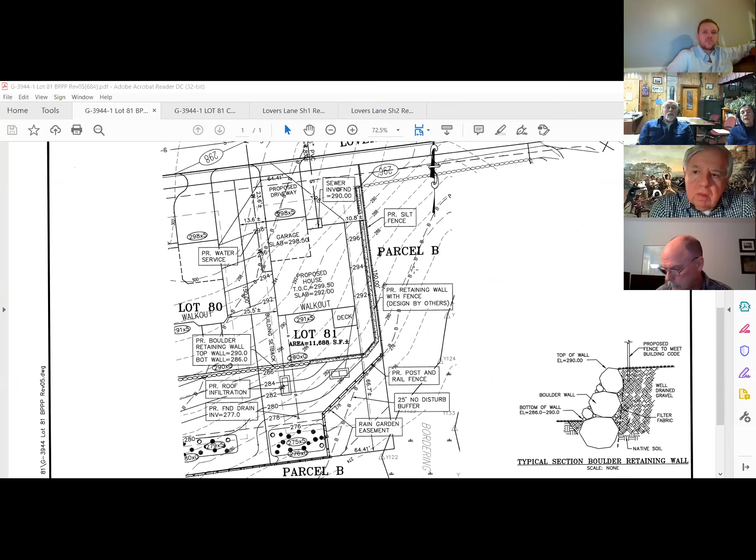So the first cross section we have is north-south, running through the center of the lot where my cursor is going through. The cross-section view is facing east towards the open space parcel, so Lover's Lane would be on the left-hand side of that cross-section.

For the second cross-section, another one is provided with a little more detail on the Versa-Lok plans, but it's just looking facing the wall from parcel B. This cross section is more to illustrate where the building would fall in relation to the overall length of the wall, and it also shows the existing grade at the face of the wall so the commission can have a bit of understanding there.

The final cross section we have is through the center of the site, and it's from a view as if you were standing at parcel B, looking north from the bottom of the hill, looking up essentially. Just so everybody's clear there.

Is everybody able to see the cross section now? We are, okay great. So as mentioned, this is facing east, and it's a north-south cross section. Existing grade is the dashed line represented here. We have a proposed grade sloping to Lover's Lane on our property, a garage showing the footing as well, basement area, first floor, and then our proposed grade to the Versa-Lok wall.

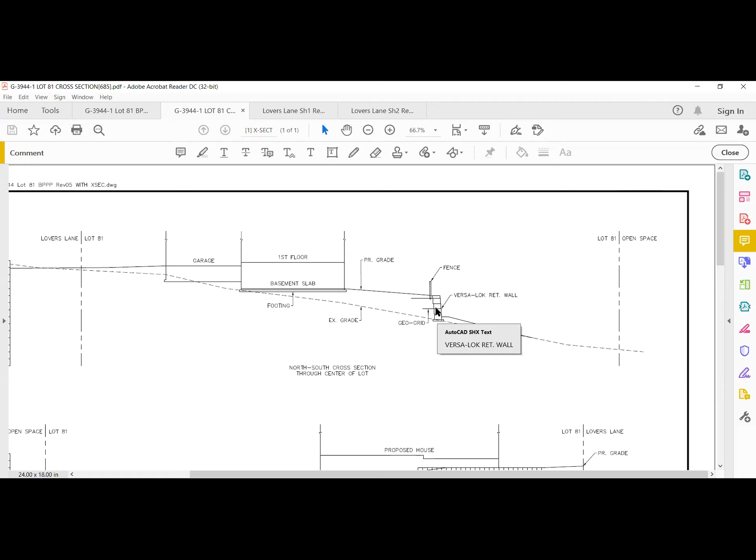Essentially for the construction of the wall itself, and then this would also wrap around the wall. But we will be digging out for the footer here, very minimal into the existing grades. We'll be installing 2 to 3 blocks and then have the geogrid pulled back as needed for it. That area in between the existing grade and where the geogrid would be compacted.

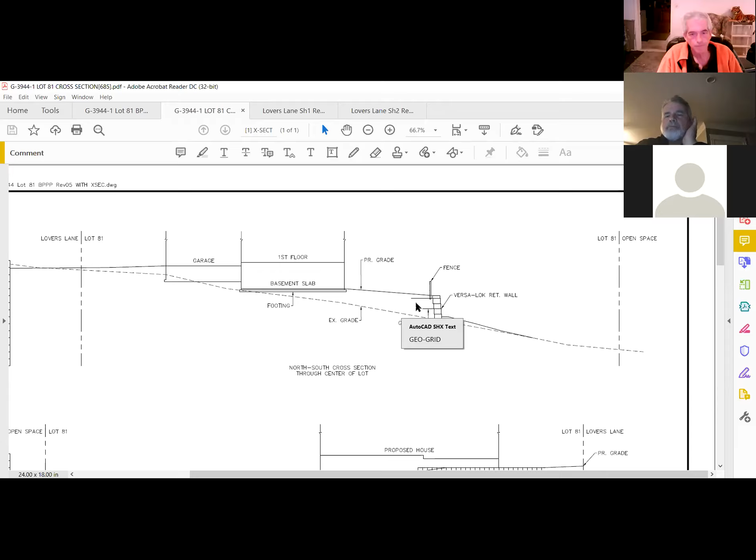And then as everything is compacted and leveled out at that point, we will be then going up additional courses. It's not that the wall would be installed first and then any backfill to be taking place. Everything would be done in essentially like a 12-inch lift as we get up to final grade at that point.

Is there any questions right now for at least this cross section through the center of the site? I don't have any, Frank. I mean, nope, I'm fine, yep. The rain garden's to the right, right?

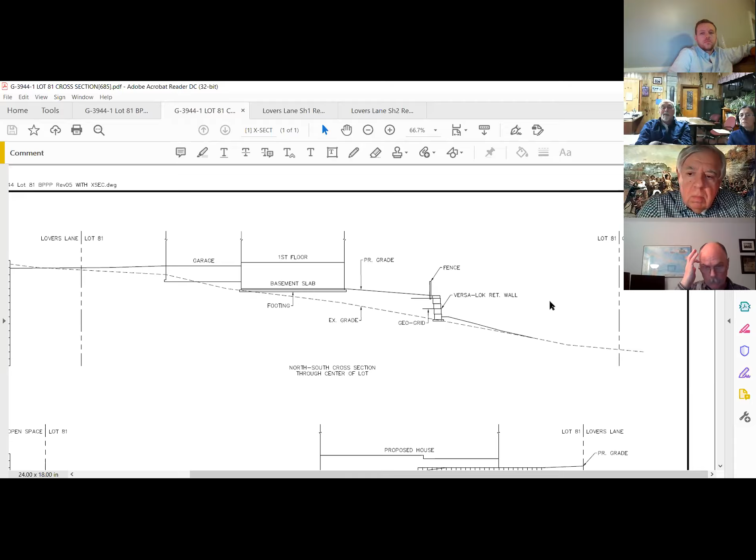Yes, the rain garden will be located down here. Because it was cut through the center of the site, the rain garden did not fall into that view. But essentially where the rain garden is, if we were to essentially reposition that, it would just divot down a very little bit and then come back up meeting existing grade. There is no intent to have any additional fill or anything brought in to create that there.

And what's being done with the slope between the rain garden and the Versa-Lok wall? What is the plan and the operating plan? What are the plans call for?

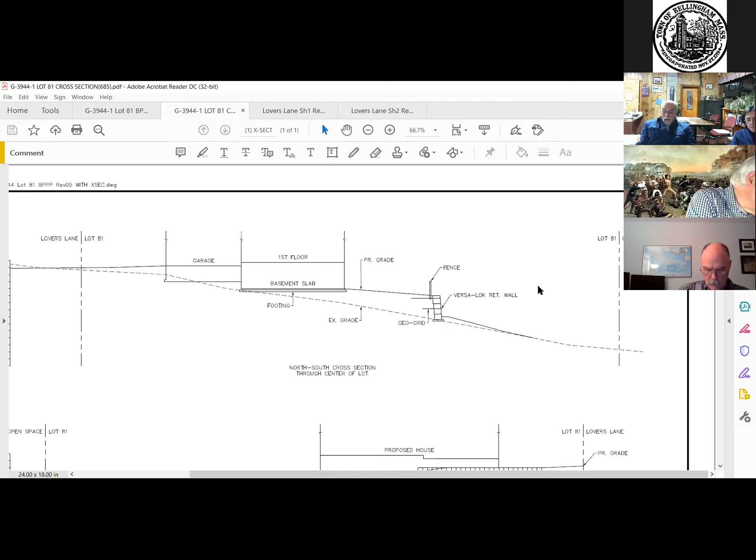So right now, as far as the slope goes, that's going to be just proposed as a 3:1 slope. It's intended to be a grass area, but if that's something that the commission would like to carry over any of the other comments from the past lots that we had, like 78 or 79, we can obviously update with any sort of notes if needed for that.

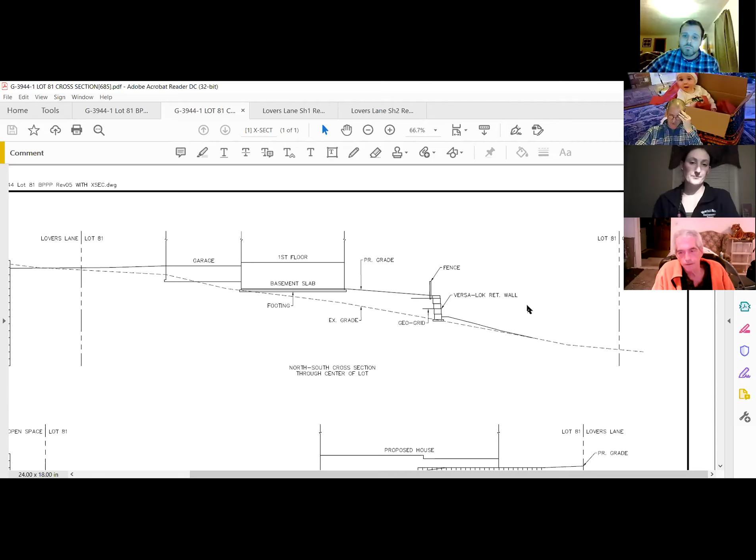I do have a question slash observation. If looking down at the overhead view, if I remember right, the left side of the lot as you're looking down on it and with Lover Lane at the top, the property 80, I think it is, to the left of it, abuts it completely, right? I mean, there's no like right-of-way easement or pathway through there, correct?

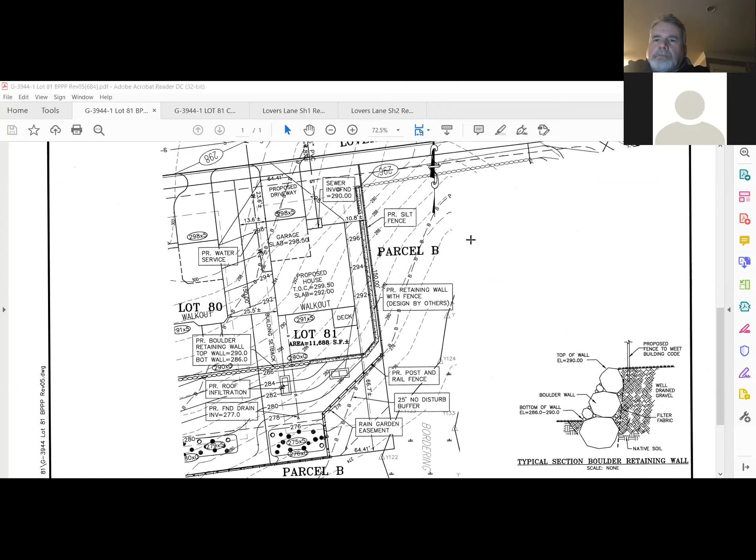So 82 is over where my cursor is shown over here. The open space is there, Mike. No. To the left as you're facing the view right now. Lot 80, sorry, not lot 82. Lot 80. Yes. Okay, so my question is this.

If there is a wall that is at the lowest point, the left-hand corner of lot 81, the block stone combination, and then it becomes all stone boulder wall, yes, goes all the way off the property, and it's grass below, how is the property owner going to maintain that grassy area and mow it when they can't get over a wall with a mower? Because they can't go down the other side of the parcel B area to get access to it.

As far as that goes, that's something that we could possibly have maintenance done through the rain garden easement. If there is a concern over that, we really can't grade in anything for a slope there, but no, I'm not looking to grade it a slope or anything. Don't get me wrong, I'm fine if it grows in and becomes vegetated heavily, but I'm thinking the property owner might not want to have that happen or feel that they have to maintain it or something.

And there's a stone wall which stops them from mowing the small area in the backyard and then over into and around down toward the rain garden. Certainly don't want to mow the rain garden, but it just seems like you've created a barrier that's not going to be able to maintain a grassy area. So maybe the commission or developer wants to consider something alternate for that area.

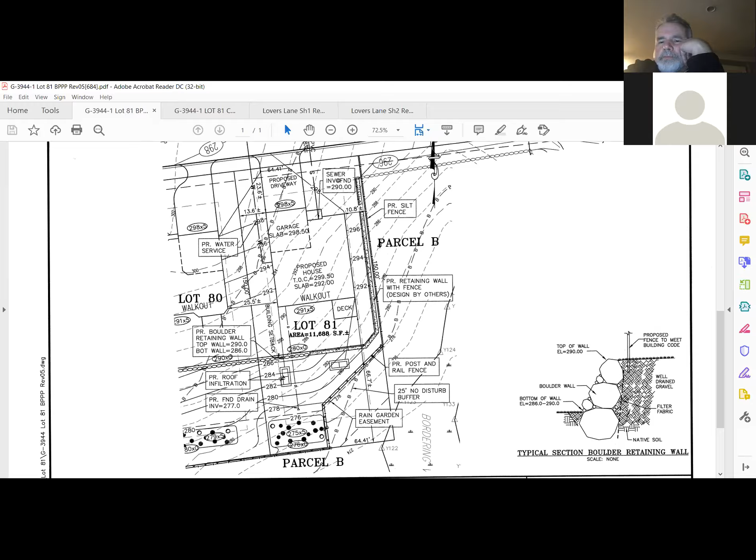As far as alternate goes, what would be some of your thoughts with regards to that? I think your initial thought was correct - if the property owner decides it's too onerous to perform maintenance on the area, it will become naturally vegetated, and it won't affect the rain garden function because the roof infiltration units will be providing sufficient groundwater to keep that viable. Also, it does pitch towards the rain garden, so any runoff that doesn't infiltrate into the ground will eventually make its way over to that rain garden area as well.

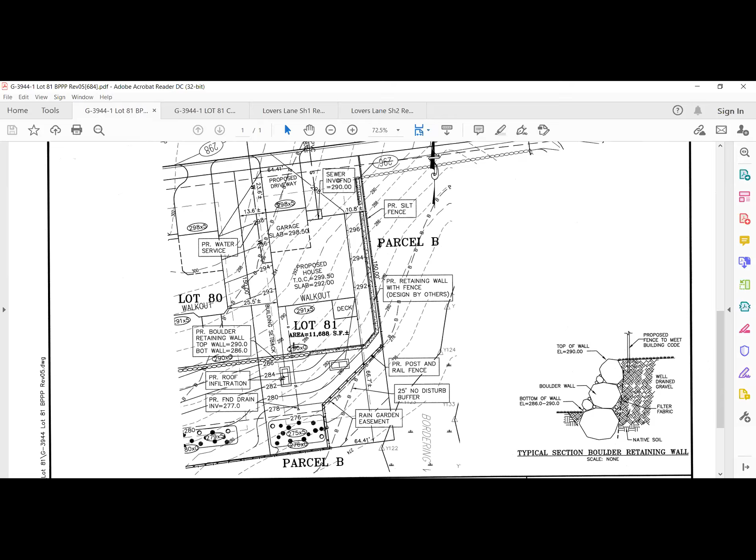I think, Mike, if somebody buys lot 81 or lot 80, their backyard is the 20 feet from behind their walkout to the wall - that's going to be their backyard. I have no confidence that it will be clearly explained to the property owner that they don't have to maintain it, and that it's fine with us not to maintain down there. In fact, if trees start growing up, they may want to preserve their view. I don't know how nice a view it is to see scrub pines popping up beyond their wall, and whether they'd want to maintain it knowing it's still on their property.

So just the access point - we don't want people climbing over the wall back and forth lugging equipment, or if they chop down trees, they shouldn't leave them back there. There should be some sort of clarity to the property owner as to what they should or shouldn't do beyond the wall. We're going to have badges on the fence, correct?

Yes, that would be the intent for it. And as far as that goes, I'm sure we can put something together to inform the property owner. I don't believe they're going to be receiving a copy of the plan, so I don't think notes on the plan would be sufficient. But if that's something we need to include, like in a purchase and sales agreement or something along those lines, I'm sure we can talk to the applicant's legal team about putting that together.

John, when you said we could access the area back there through the rain garden easement, it sounded like you were speaking on behalf of the developer, a property improvement agreement - what do you call it, a land property owners committee or association? Is there one? I'm not sure what would be proposed for that. I do know that we provided a rain garden access easement, so if that area absolutely needed to be accessed, they could get through it there.

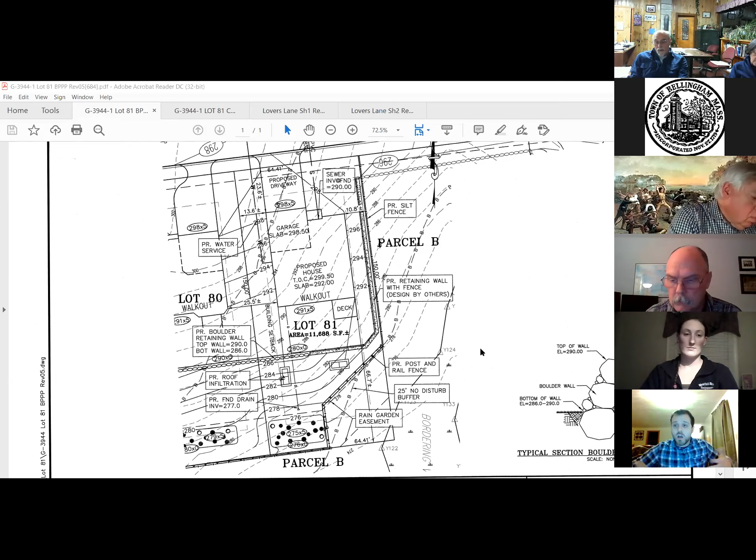Sorry for cutting you off, Cliff. Go ahead. I was just going to say, from a logical standpoint, I don't really foresee somebody wanting to go all the way around to the access easement or having to traverse that 4-foot portion of the wall just to use a sloped area. So there shouldn't really be concerns about people going down there to try to use it. Also, bear in mind we have the fence proposed along there to help deter anybody from throwing clippings over, or lugging equipment over the wall.

So let's take a look at the next cross section. Sure.

So the next cross section I have here, as mentioned, this would be north-south facing west, so we have Lover's Lane on the right-hand side of this cross section. Essentially this is just showing a view of the wall if you were looking from parcel B, but mostly this is to show the relation of the house to the wall. So this is the 20-foot backyard area they would have, and this space would be left open with the no-disturb buffer, so nothing would be touched there. As far as the footings shown here, this was prior to receiving the structural drawings from Versa-Lok, so I estimated these, but I'll go into more detail when we look at the Versa-Lok ones for the actual depths we'll be excavating through there.

Again, this was just more of a visualization for what would be going on. That's exactly what we are looking for.

One quick question, Cliff, if I could. The dotted line, John, that represents the existing grade. I understand that the Versa-Lok below the grade measurements might be more accurate and different than what you're showing. That's fine. Above the existing grade line, however, is that a correct representation of how high the wall will be in the back as compared to the front of the lot above the grade line?

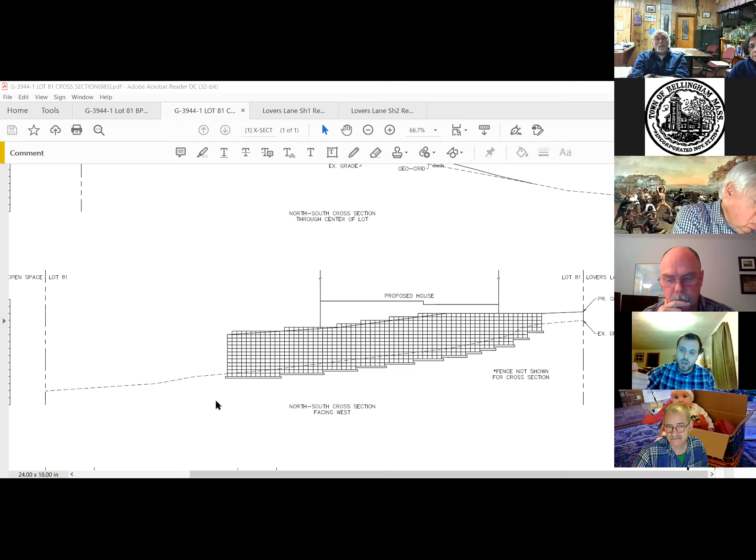But as far as this dashed line representing the existing grade goes, that is cut right through the front face of the wall. So if we were to go right up to the wall after it's constructed, this is what the grade would be there. And that is something that would be protected by the silt fence, so nothing would be changing on, obviously, the open space side of things there.

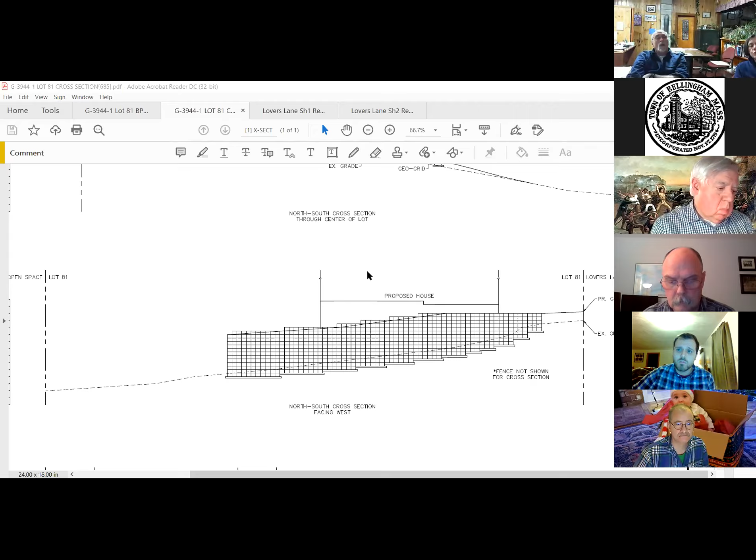Yeah. So let's take a look at the Versa-Lok engineered drawings. I do have that final cross-section if the commission did want to take a look at that at all. Okay, sure. And then that final one was just the cut through the center of the lot.

As I mentioned, the grades do taper off into that southeastern corner of the site at the bottom of the overhead view that you were looking at. So again, we would be going in, digging down approximately 22 inches to where the bottom of the base stone would be. They would be filling in about 6 inches with sand or gravel as specified on the structural plans, and then we'll start installing the blocks.

Once they clear 2 to 3 blocks, they would be having the geogrid pulled in. That would get pulled as far back as needed and then compacted and filled accordingly. As they progress up the wall and compacting all the way out to meet existing grades, once they get to the point of where the foundation would be, then that construction will be done in conjunction.

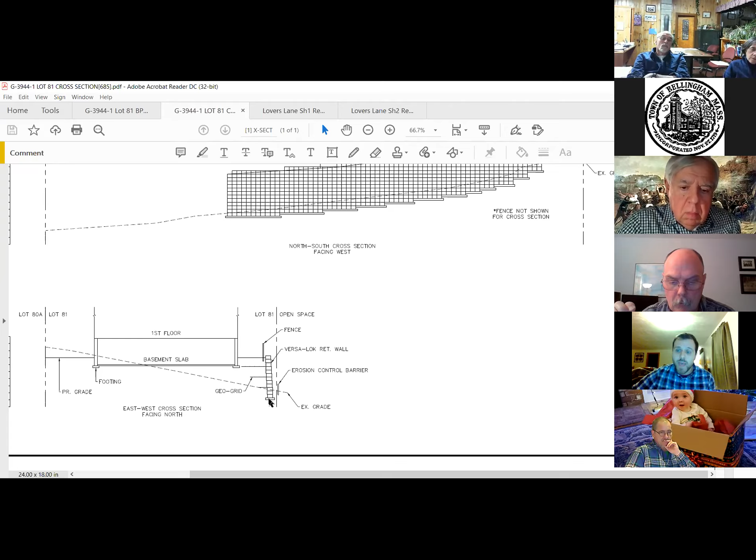Essentially, as we've already stated previously, no work will have to be done on the front side of the wall. Everything can be constructed on the back side. Essentially, they would be using the compacted area as a flatter base to do work as they work their way up, and then can blend in anything accordingly with it.

And then again, this is just more for visualization purposes, but if there are any questions, I can try to answer them.

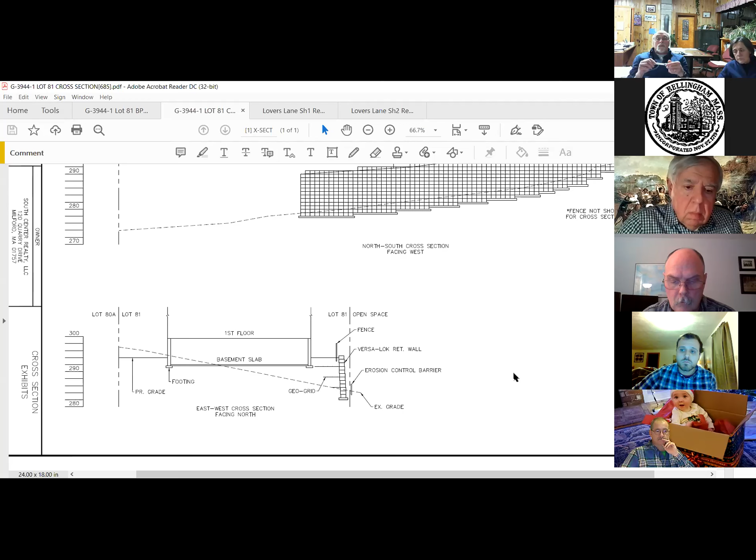Okay, let's look at the Versa-Lok, sure. Versa-Lok engineered proposal.

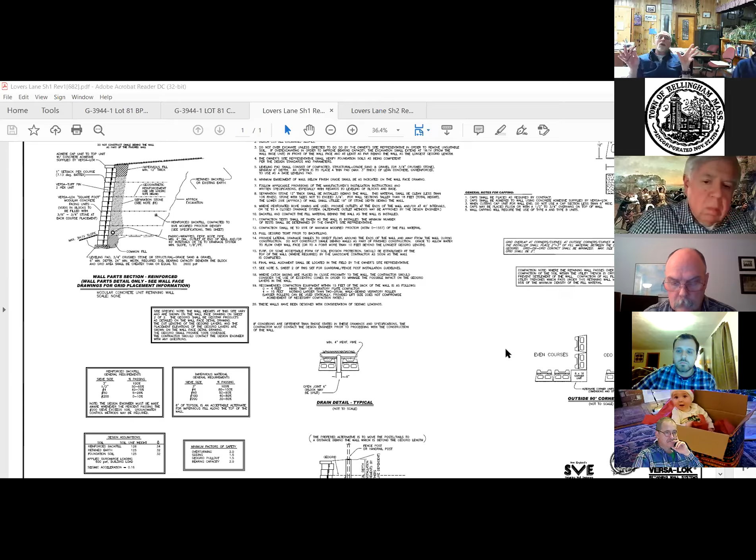I see our Director of Inspectional Services is present. And once we take a quick look at these, because everyone's had an opportunity to peruse them, I'm going to ask that our administrator relay the conversation that she had with our Director of Inspectional Services relative to the actual construction methodology. And then we'll have Frank comment on some of his proposed special conditions, because I think it's all going to be tied together. So if you would proceed.

Sure. So with regards to the Versa-Lok plans, the structural engineer, his name is Randall Brogdon, if I'm pronouncing that correctly. I did speak to him on inspections that would be done for the wall, as that was one of the comments brought up during the last meeting. Typically, he would be going out to do 1 to 2 inspections, but any more, or if any are not needed at all, that would be dictated, he said, by the municipality directly, since this is going to have to be pulled with the building permit through the building department. So he will be the one that can certify the wall and any construction that will be completed as satisfactory.

With regards to the actual construction itself, after speaking with the applicant a little bit further, they are going to be subbing that out to a third-party contractor who specializes in Versa-Lok walls. And if needed at all, as mentioned during one of the last meetings, Versa-Lok does offer to have one of their representatives come out to also help oversee that construction to make sure that everything is done according to the plans and to Versa-Lok specifications. As far as the actual plan itself goes here, are there any particular areas that you would like me to note or zoom in on?

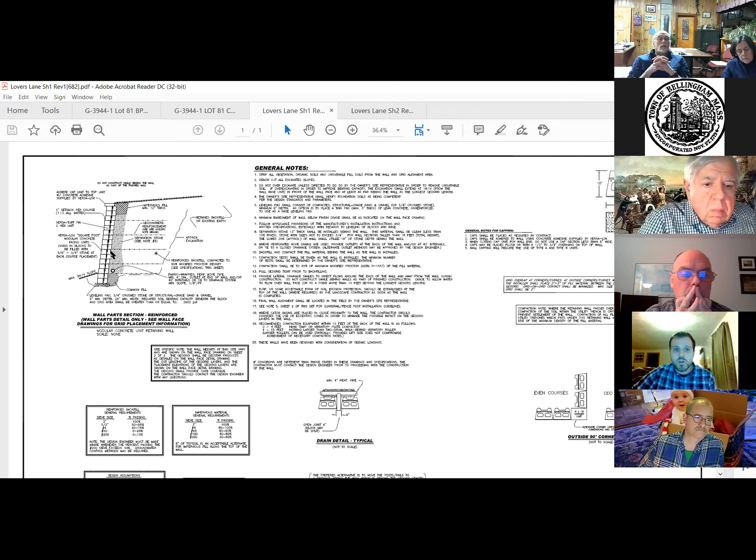There's no concerns with any sort of water or hydraulic pressures trying to push out the wall and cause failure there. Also with regards to that, outside of the 12 inches of separation stone, they have a note for any backfill that would be placed there, as well as notes on their compaction.

Outside of that, it's just more of their general notes. They do have a curve detail down here that adds to the structural integrity of the wall. Instead of the 45-degree angles we had proposed there, they would use the blocks and do a slight offset adjustment with them in order to provide this curve.

As mentioned, that is more structurally sound versus having to cut the blocks or create a 45-degree angle there. They also provide a typical fence post detail, and on the next page they have installation notes for those fence posts. It's recommended that the fence posts be installed outside of the geogrid lengths, but in this case they would have to be installed behind the wall, so they have special notes for the care of the geogrid to make sure nothing jeopardizes its integrity.

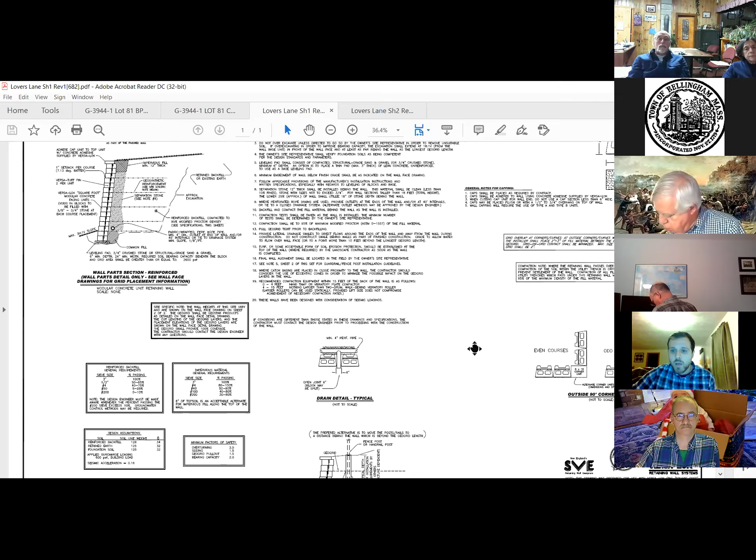Outside of that, let me just see here. They also provide a compaction note as well as a standard block view. There is a second sheet that provides some more information, including a cross section as well as those notes I mentioned on the post for the fence installation.

Is there anything before I swap pages that you would like me to zoom into or note specifically on this here?

I think I'm okay. Frank? You okay? I'm okay, yeah. I think some of the questions I had, we'll get into later, but they're being answered.

Another thing just to note while I have it fresh on my mind, I know there were some concerns working in close proximity with the wall and the foundation. They also have a note here on the compaction equipment.

Anything between 0 and 3 feet will have to be hand compacted. Then anything from 3 to 15 feet away from the wall, they specify no large machines other than a 2-drum walk-behind vibratory roller. That should be able to fit within the amount of space between the rear of the wall and the foundation without any issues there.

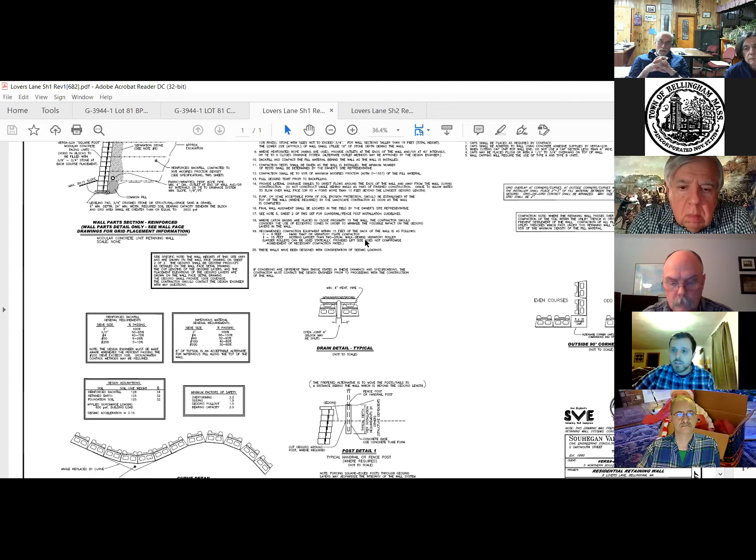And that's not something that again would be using any large equipment on the opposite side of the wall or doing any work on or close to the open space side of things.

And the foundation will be constructed concurrently with the construction?

Yes, once it reaches the level of being flush with that layer of block, geogrid, and any compacted material, they would start to set up the forms and proceed forward with the foundation construction, again in conjunction with the wall construction.

Okay, so like I said, our Director of Inspectional Services is present. Tim, is there anything here that is unusual? I know we have some issues about the fence post installation and all of that. When they pull a building permit, if you would let the commission know, how does that process work? How would you interact with the inspection of the engineer of record? How many inspections would you require to make sure that the work is done properly?

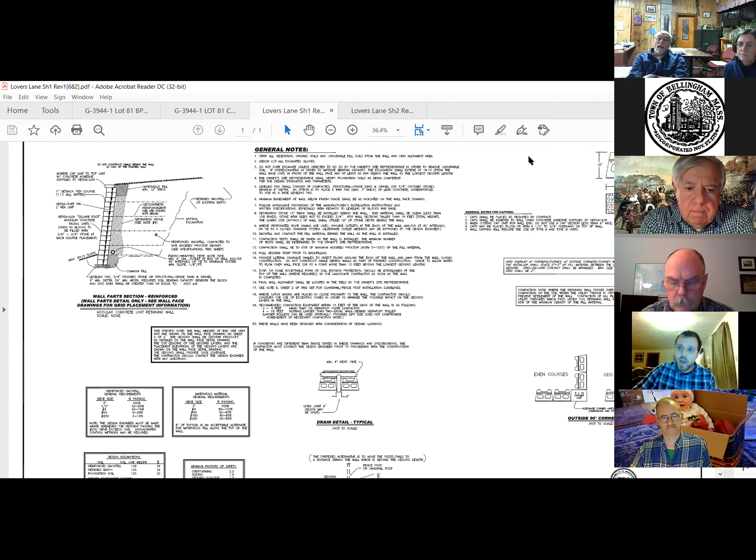Okay, so that was one conversation we had. And the 45-degree corner on the wall, is that out now, and you're going to radius it like that? Well, as far as it goes, we're still proposing that, but during construction they would be following what they have here for a curve detail. They also have some specifications for those. Since the blocks aren't perfectly square, as you can see in the upper left-hand corner here, that does allow for some flexibility in terms of how close they get those in order to help make that radius. And that is something that I believe might be mentioned in one of their notes, or at least it was in my discussions with the engineer, that it actually makes for a more structurally sound wall than if we did try to have it as a 90-degree or even a 45-degree angle. Yeah, no, I can see that definitely.

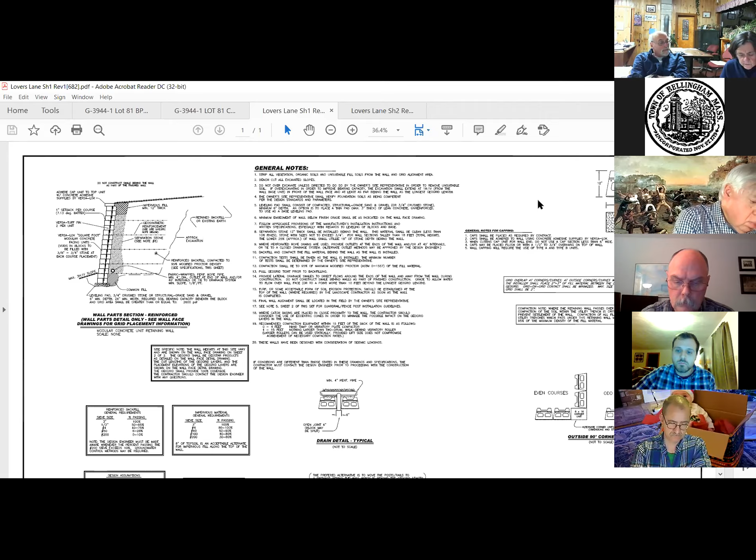All right, so moving over to the fence post installation. I saw the note that the manufacturer put on the plan regarding the fence post. So with the geogrid going through the grid, the posts are going to be - I can't tell what the scale is. How far from the top of the wall is the fence proposed, I guess? Right now we don't have anything set in stone for that. Essentially we would be going behind the wall with it. Whatever is typical in that case, I don't know if they would come 6 inches off the uppermost block, or if that might be a foot off the uppermost block. But whatever is typical there, that's where the fence post would be installed, running parallel along that whole length.

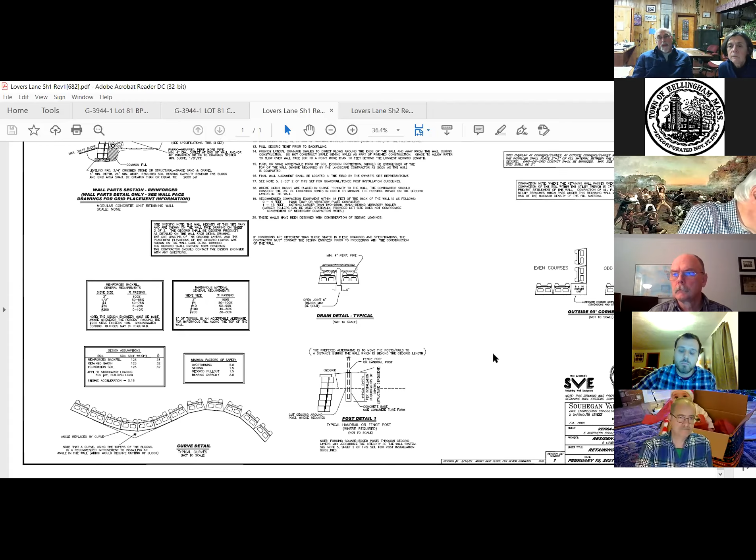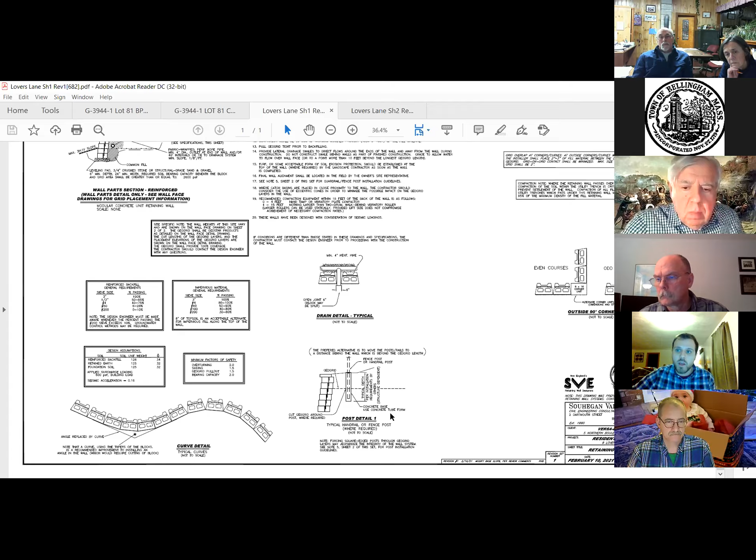I can see what their concern is, that's why they put the note on there to cover themselves. But am I looking at this correctly? Is there going to be a sleeve installed while they're doing the geogrid? This is a typical one. As far as what the specifics are for the fence post installation, that would come from the contractor. I know that they do specify, and I can show on the second sheet if you'd like me to flip over to that now. Sure. They do have a few alternatives listed. In the notes, they state that they do not recommend or would like to see any sort of square posts installed that way. But they do allow for a rounded post, and if it does need to have a concrete sleeve, they have specifications in there for how to handle that.

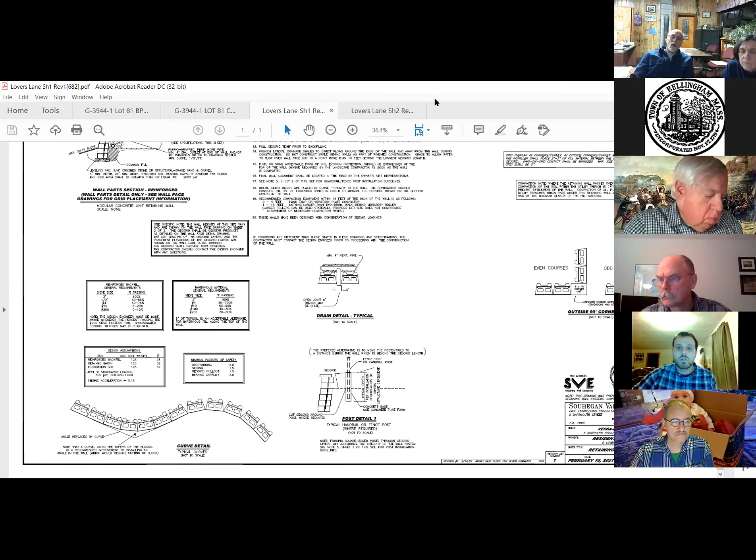Yeah, please go to the second page. I think it's more illuminating.

Tim, I did speak to John about shifting over the construction of the house. I guess they have to adhere to the zoning board permit of the 25-foot setback from building to building between lots. Is that correct, John? That is correct.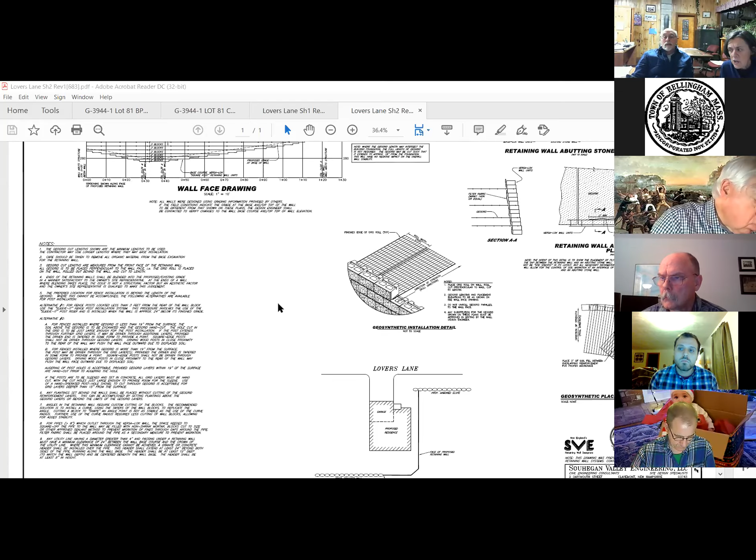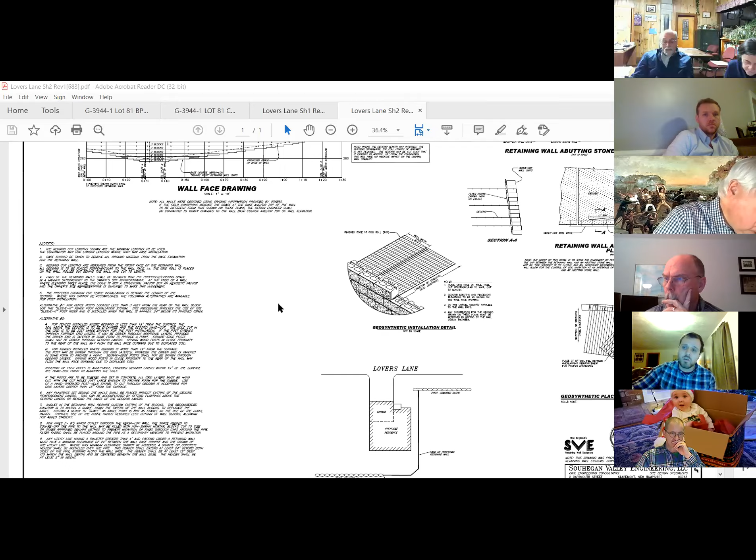Currently on the plan, and I can flip it back after we take a look at sheet 2 here, it is at its closest point 25.5 feet away from the adjacent structure. That is something we try to provide on our survey side, about 6 inches of play, to make sure we don't have any sort of issues once everything is constructed. Since we are tight to the setback line, about 10.8 feet, if I recall correctly, with a requirement of 10 feet for the setback, most likely that side would be pinned at the footings to allow them to do any sort of offsets accordingly to get to the other side. If that makes sense there. Yep, okay.

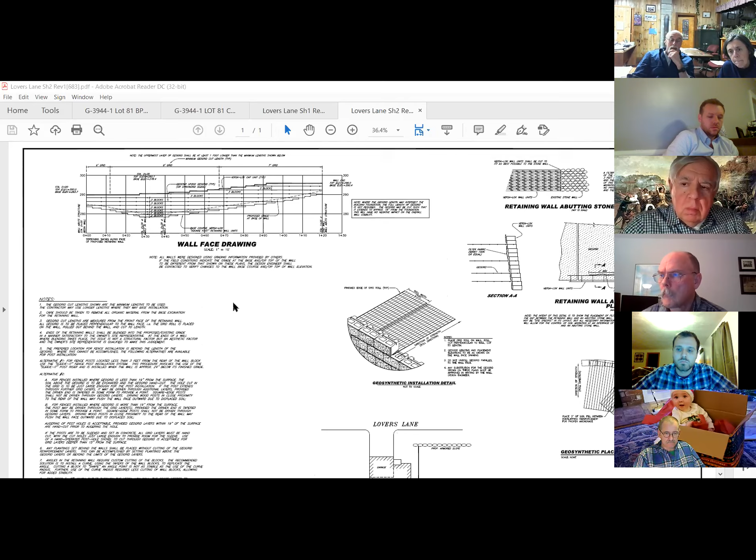So on the fence installation, I'll work with the contractor on that. He's going to pull a separate permit anyway. I think the best way to proceed would be to lay out the fence posts while they're doing the grid, instead of just driving something through it.

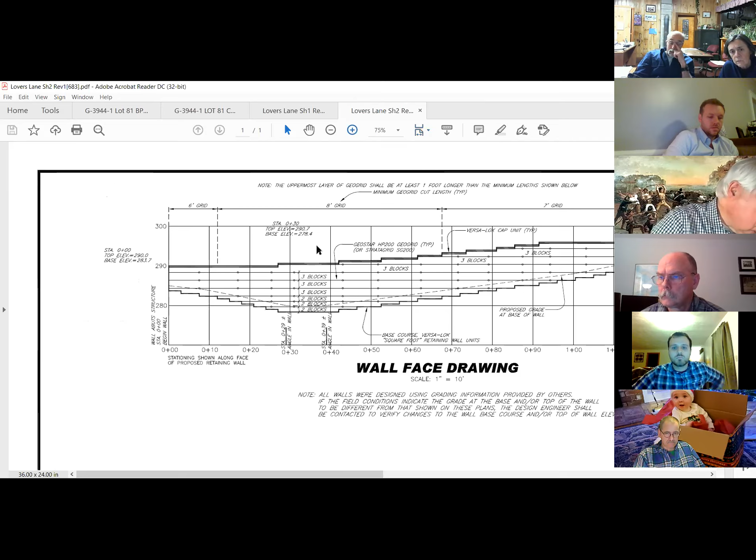You know, cutting a circle in it and doing the layout of the fence posts that way, they could just put sleeves in and then put the posts down into the sleeve. But I can go over that with the contractor when they get going and coordinate inspections. I just want to see the geogrid put in the way it's designed, at the end of the day.

With regards to that, if there are any concerns over the geogrid, there are a couple of notes here we can go over more specifically. As of right now, the alternatives provided start at note 5: preferred location for fence is beyond the length of the geogrid. Where that cannot be accomplished, the following alternatives are available. Alternative 1: fence post located less than 3 feet from the rear block, use the sleeve-it fence post installation system.

The procedure involves a sleeve-it post riser installed when the wall is approximately 24 inches below its final grade. If there is any geogrid that riser would have to go through, they recommend hand cutting the geogrid at that point. Pretty much all of this installation would be hand done, nothing with machinery.

Alternative 2: if it's going to be installed within that 3 feet or so, and there is geogrid located 19 inches from the surface, soil above the geogrid is to be excavated and the geogrid hand cut. The hand cut hole in the grid should just be large enough for the post installation. If the post extends to further grid layers, it may be driven through additional layers, provided the driven end is tapered to form a point. They also note that square posts shall not be driven through geogrid layers, since driving wood posts in close proximity to the wall may push the wall face outward due to displaced soil.

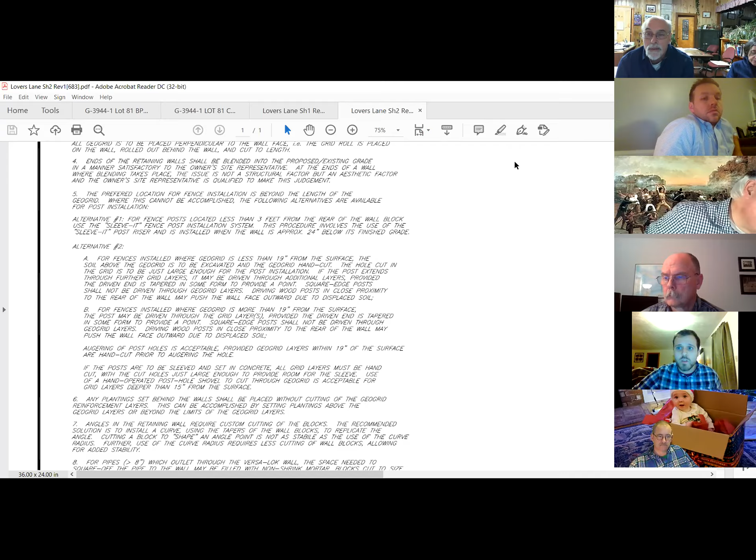I don't handle anything on the architectural side for the house construction or anything on the structural side for the wall construction. If they do need to have somebody available for that, we'll try to note it to them with as much time as possible. But as far as we go, we're just handling the site development portion, so I'm not specifying anything just yet on that.

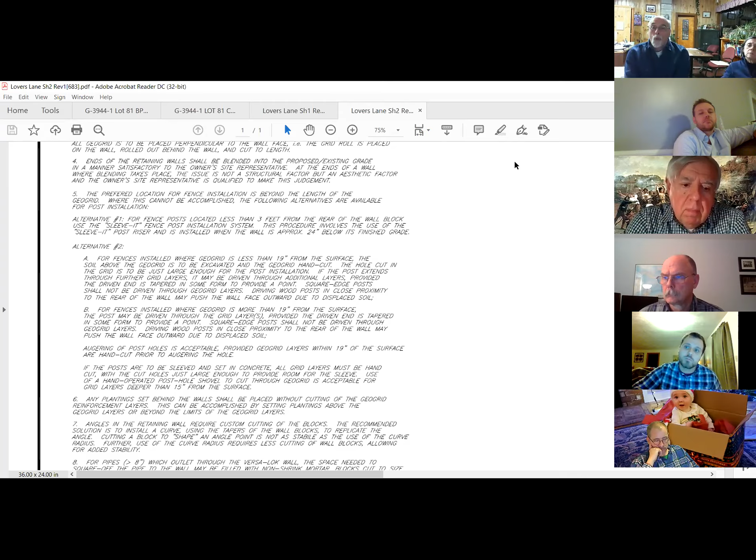Yeah, I meant the foundation wall. With regards to that, I figured that would be more of an architectural specification, but if it is something that we can note, I'll definitely have that mentioned to Fafford. I'll take a look at it on the site plan. We can condition that, and that way you'll get the compaction information that you need.

So one of the things, we can go back and look at the sheet that Tim was talking about, but I'm looking at note 5. It says alternative 1 for fence posts located less than 3 feet from the rear of the wall block. What is the minimum distance they recommend for putting the fence next to the wall?

With regards to that, I did not see any sort of minimum distance that they had specified for it. I'm not sure if there's anything in building code that would dictate that. I would anticipate that they might be going a foot off of the rearmost block and then installing it, but I'm not sure if there are any specific rules or regulations.

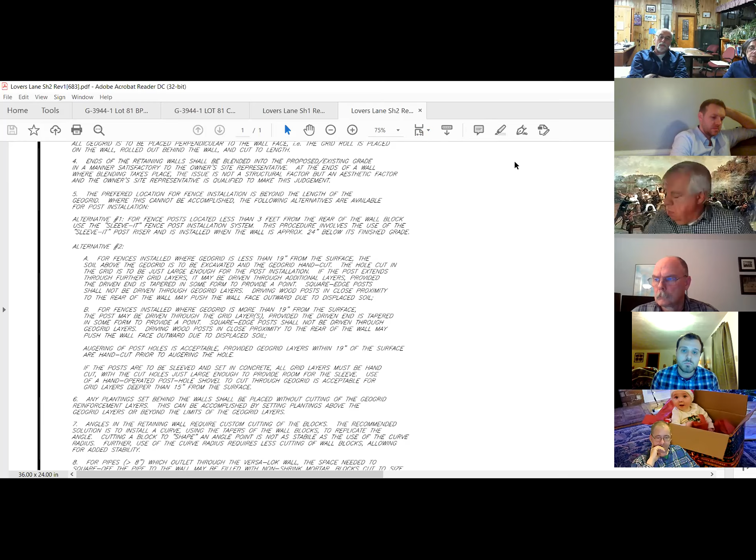You know what I can do, Cliff, is when they submit a plan for it, I'll just be looking for that, and I can talk to the engineer on it. Whoever submits the permit for the wall, I'll have to get a detail for that. One of the things we're concerned about is because of the distance between the foundation and the top of the wall, we're talking 10 feet. Obviously the developer is going to want to maximize that area for egress.

And yet, from our perspective, the further away from the face of the wall the fence is, the more secure the wall is going to be in the long run. So there's kind of a balancing act here. What we don't want to see is, for expediency for the homeowner on the wall, the fence being a foot or 6 inches off the wall, because in the long term that could affect the integrity. I don't think it would necessarily affect the integrity too much.

I know that anything they have specified for cutting through GeoGrid, if that might be the concern there, there is a note that it would not be affecting anything adversely. But if there are any additional concerns I need to follow up with the structural engineer on, I can definitely do so.

Well, so that was my point, Cliff. I'd rather see them show it on the plan going through their product. At the end of the day, they're the ones responsible. I don't want to put my 2 cents in on that. I want them to design it and have it be their idea, so there's no liability on anybody trying to design where the fence goes. You follow me? Yeah, fair enough.

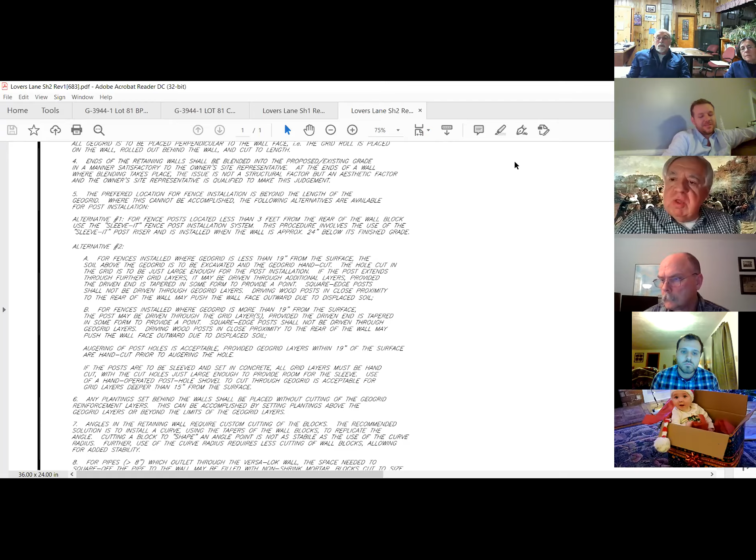I'm actually happy to hear — my understanding is, how do I put this gently, the performance in construction on this site in the past has not been the most stellar in the world. So I wouldn't want something to happen with this wall that's 10 feet high that hasn't been done and appropriately reviewed. So maybe there's a condition, maybe with Tim, that the person responsible on the site is somehow qualified to make the statements required by Versa-Lok to make sure the wall stands up appropriately, blends in appropriately. I think it's basically meeting the building code, to be perfectly honest.

So I think if they're going to have the owners, the engineer was going to do some independent inspections for the wall, so I think that's a good thing. The other thing is when they start construction of the wall, I would go out there to make sure all the topsoil and sub is gone and they're not on fill, they're down to clay or whatever the material, or if it's rock material, and then they can start from there.

I think in the past they've used Yankee for their compaction testing, but now that I have a heads up on everything, I can see the foundation is a fill and part of the wall is probably a fill, depending on how accurate that dotted line is for existing grade. But at the end of the day, they have to scrape off the topsoil and sub and it goes lower. So I'll keep an eye on that when they finally permit for the wall, and I'll have to do some inspections as well.

I think the other piece I had was there's a lot of really good detail in the Versa-Lok design plans. As I mentioned, I've worked with Versa-Lok on other projects on my own over the years. I know Randall Bragdon, I've talked with him. I'm not very friendly with him, but I've known him. The projects he's built, designed walls on, are still standing and have done pretty well, so I have good confidence in his design.

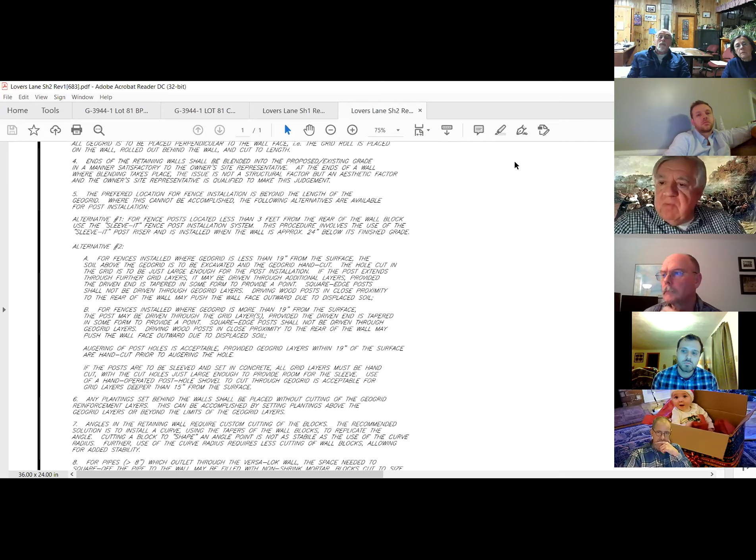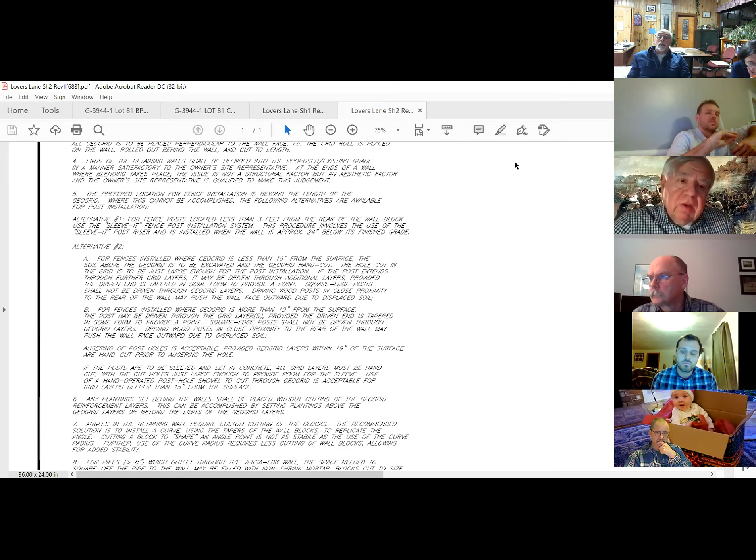The tight area beyond, I guess on the easterly side, the open space parcel B, it's very tight. If you go from the bottom of the wall, it's about 10 feet high. The wall sets back a foot, sets back every foot about an inch, so you've got about another foot from the bottom of the wall face to the top of the wall face. You're now about 8 feet, and that's just about where the 7-foot grid fabric is. There's a note that says you can cut it back some if you get close to the building.

I'm very pleased. I know they mentioned last time it would be nice to get it in writing, that the way they're going to build this wall and the house is concurrently, with the wall being brought up to a point. They do the foundation, they bring the wall up back and forth, because it's a very tight area, about an 8-foot area. You're going to have to fit something in there. I think I'd be a little bit careful with that one.

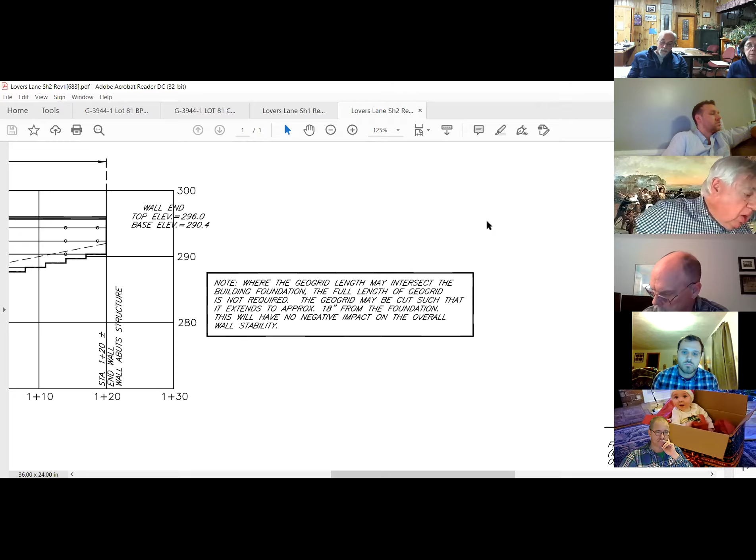Really, I think all the items, my notes got answered, my comments got answered, so I think I'm pretty comfortable, subject to those, whether it be conditions or whether they be under Tim's control or whatever.

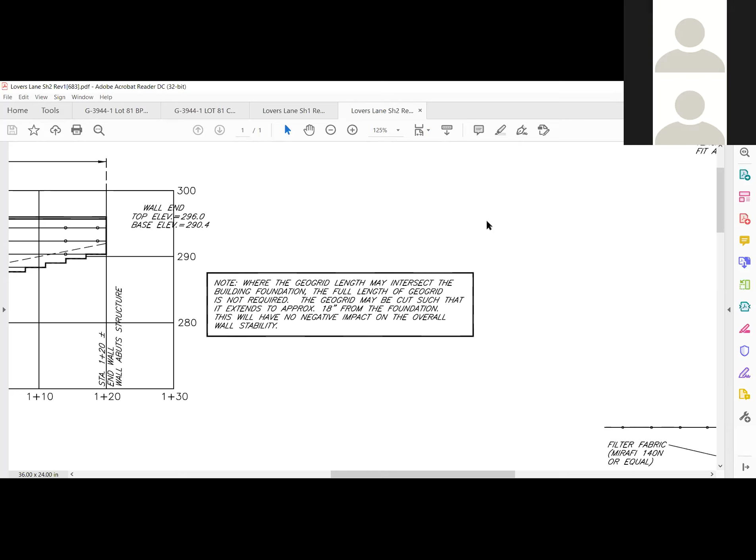All right, any questions from the committee? We heard from Frank, we've heard from Tim. Tim, thank you for your inputs, most valuable. You're welcome, thanks really Tim, appreciate it. No problem. Any other questions from the commission? I would give any other commissioners a chance. I have 2 questions, but I'll let somebody else go first if they have any. Go ahead, Mike.

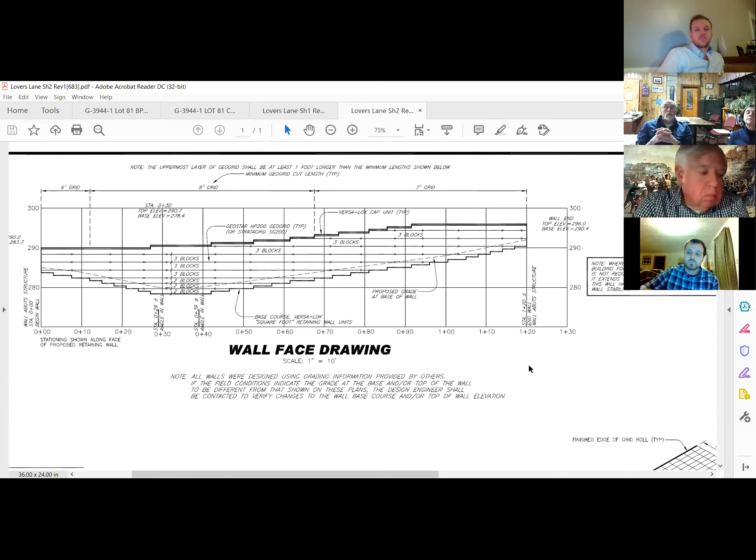John, can you look at the overhead view of the wall in the back there? I'm particularly curious as the wall is now going to be not 2, I think it is 45s that you're showing, but a curve in the back corner there, if I remember that elevation or overhead view. Sure, bear with me one moment here. My question is going to be how close will that curve now, because it does change the way the wall moves.

The right-hand most point, where it goes from straight to the first 45, depending on how that curves, you're right on the line right now. It looked like on that schematic from Versa-Lok that curve can angle out or in depending on how it's curving. That is correct - that's an outward curve. I'm a little concerned that it has been carefully delineated to avoid it.

It sounds like it's going to be decided in the field rather than on your plans, which still show the 45s. Tim asked if it's going to be a curved view now instead, and you seem to be saying yes, but it seems like they'll decide it in the field. With regards to that, as far as our plan goes, it is a site plan.

I believe anything for the construction of the wall would follow the structural plans in that case. If there is any more detail that needs to be put in, I can relay that to the structural engineer on the Versa-Lok side of things.

The intent from any discussions I've had would be to have those areas curving. So if they curve instead of the 45s they're showing now, and that cuts the angle off, it's going to cut it on the inside and not extend outward, correct? That is correct, so we would be coming even further away from the 25-foot no-disturb area. Okay, just wanted to be clear.

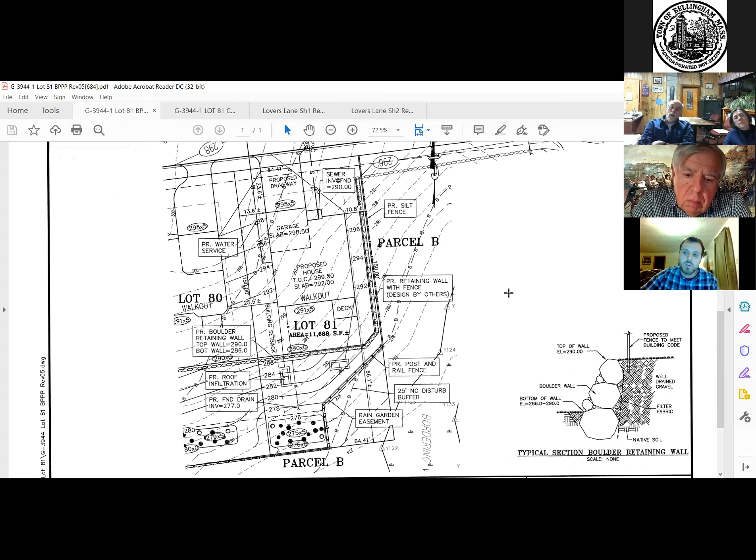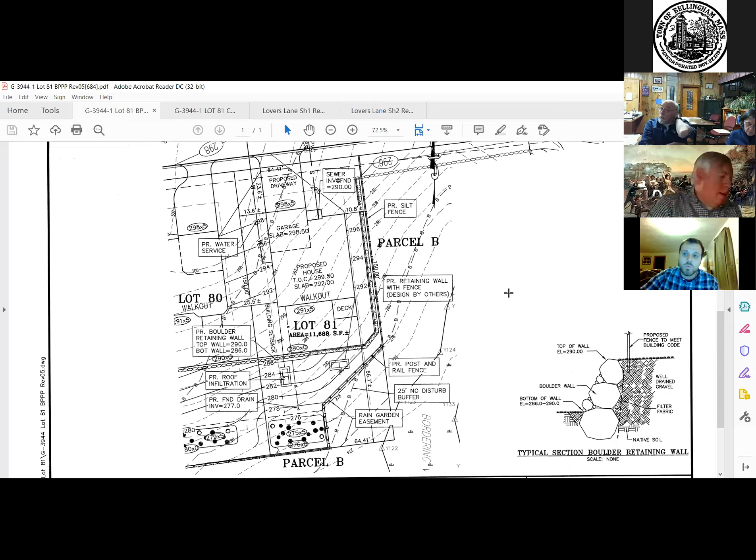Mr. Chair, I'm a little less concerned about moving this particular lot forward. Plenty of other lots in this project are moving forward. But I am concerned that if we know precisely where this wall is going to go from Lover's Lane all the way out to the other corner, I don't know why we couldn't determine beforehand whether they have the proper grade for Versa-Lok to guarantee, with the stamped engineer's approval, that the bottom of the wall meets their specs, and that they don't need to consider moving the wall. I don't go for approving on the fly. I'm sorry, I'm not in favor of that.

Well, with regards to that, I do know that I have reviewed the grades with the structural engineer. On the plans, he does have some rough grades shown. He has seen the cross sections as well. No concerns were expressed over those existing grades, particularly along the longer face of the wall. So I don't foresee that being an issue for them to be able to certify.

Have they visited the site? I'm not fully aware if they have visited the site, but we did have those discussions and provided any additional information they needed. So it's Versa-Lok's opinion that this is standard operating procedure, nothing unusual. They haven't noted anything as being abnormal for this one. I think we need to see that in writing.

And I would further add, Mr. Chair, John, how precise have you been in providing information to them about what the actual pitches and grades are along that entire length? We have provided them a copy of this plan. If they had any additional questions or follow-ups, we've been in discussions with them. I have spoken to the structural engineer regarding the wall construction, and he's not finding any sort of issues there. I'm sure if there was something he wasn't comfortable with, he would not have stamped the plan and submitted it to us.

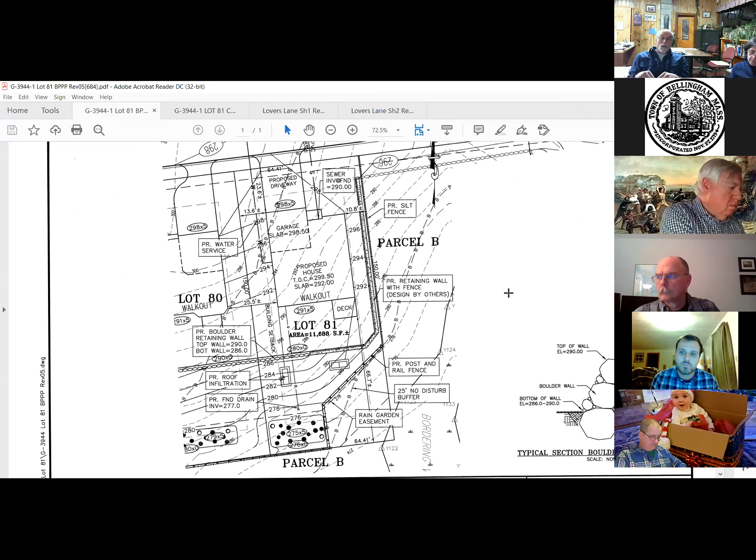From the commission's perspective, we requested a lot of information, and we've requested additional information. We've had it reviewed by the Director of Inspectional Services and by independent engineering review. And I think that we have an alternative. The only other alternative is we deny the project as being unbuildable, and yet what we have here is common engineering practices that indicate it is buildable with special precautions.

I think there was a time when I didn't think the lot would be buildable, but the questions have been answered. Mike, I don't know what else we can ask them to do. What is your thought here?

It's not going to be built by the company who built Lakeview Estates. It's going to be built by somebody who has expertise in building these walls. I've asked all the questions I can ask. My level of comfort isn't high with this. I think it's just frankly too small a lot, too close to an area that shouldn't be disturbed, and with a methodology that I'm not as familiar with.

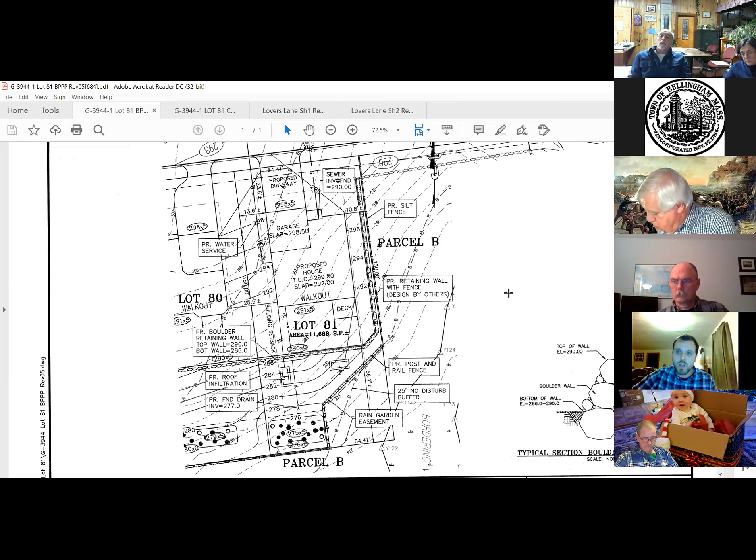That's okay. I know on my end, I'll definitely be able to get you a plan next week, so hopefully that gives you seven-plus days to review anything. And then I'll follow up with Versa-Lok tomorrow to try to get a letter from them. I can't guarantee anything on their time frame for it, but I'll definitely try to push them with the understanding that if they can get us the information, we will be able to have this off your guys' agenda on the 10th. Okay.

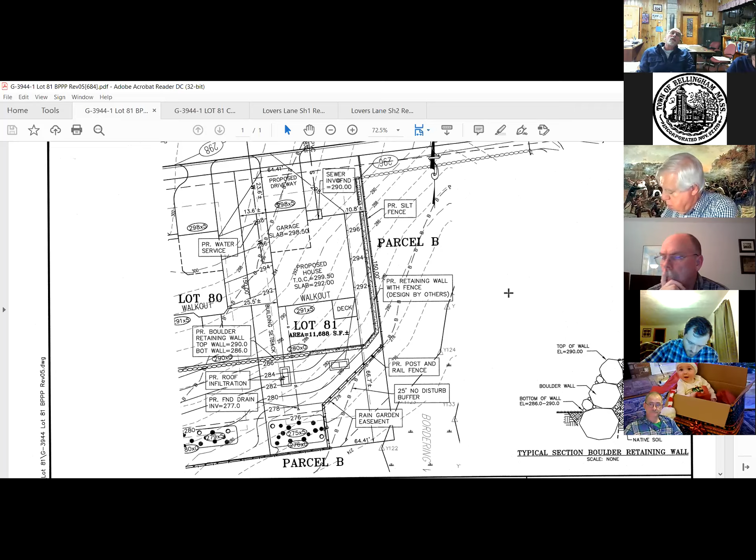Right, that being the case, I'll entertain a motion to continue the hearing for the evening of March 10th at 7:05 and have an order of conditions prepared pending requested information.

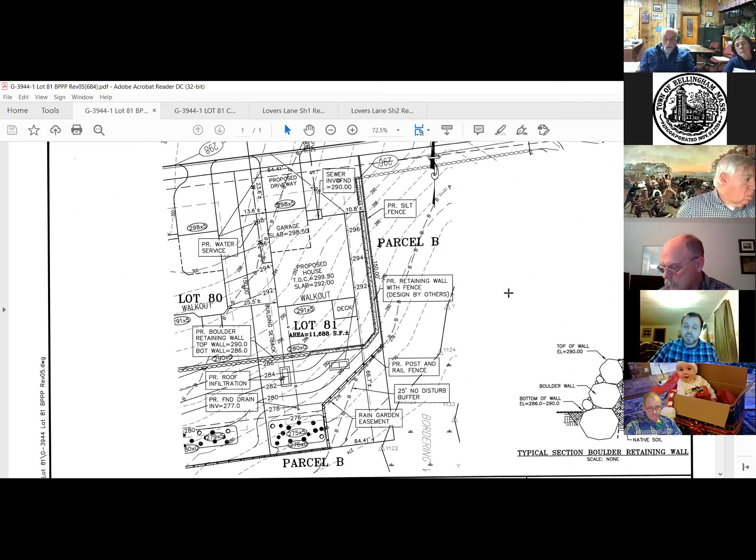Just one final question, to help keep the process moving, would you need a PDF to make any references, or do you need a physical hard copy? I will try to provide physical hard copies as soon as possible. Of the plan? Yes, or any letter as well. I definitely need a paper copy of the plan. Yeah, I will be providing that, but I'm just wondering if getting you a PDF sooner would help keep the process moving, or if you need that physical copy.

Well, I think you'll make every effort to get it to us. Of course that is the case. If I can get you a stamped copy tomorrow, but we can't get a courier over there until next week, if that's gonna hold anything up. Of course, that's fine.

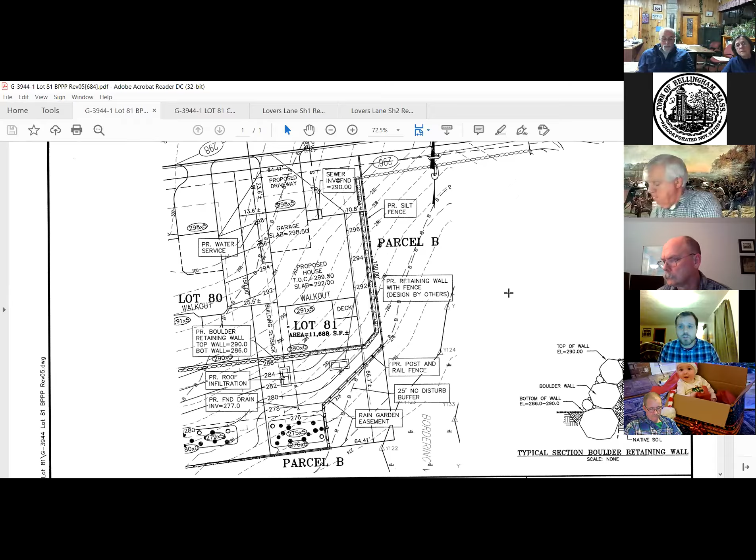All right, thank you so much, I do appreciate your time. Thank you. All right, Tim, thank you very much. Tim, we really appreciate that. You might sign it, thank you. No problem, thank you, have a good night. Thanks, you too.

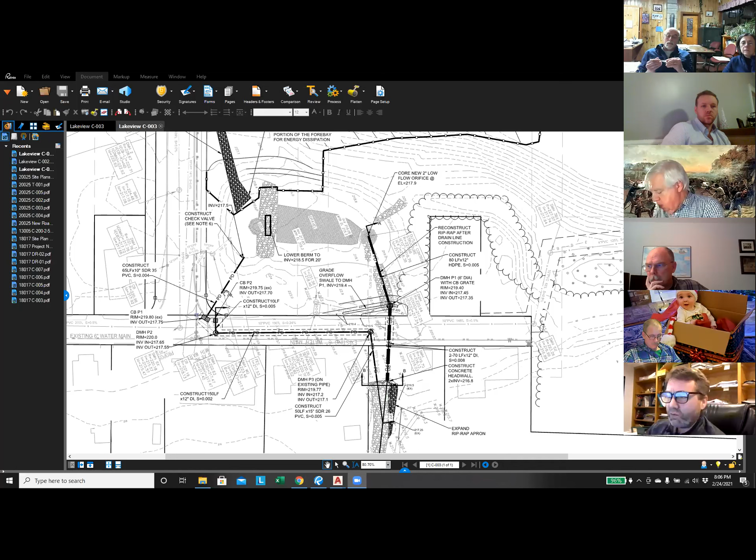Quick recap: we're proposing some additional drainage structures in Silver Lake Road, a new double grade catch basin at the base of Candlelight Lane and Silver Lake Road, which would discharge into the forebay of Basin C. Modifications to Basin C include cleaning out the forebay, reconstructing and lowering the forebay check dam so it doesn't build up as much water and head, and reconfiguring Basin C itself to be an extended dry detention basin by incorporating a new low flow 2-inch orifice at the base so it won't retain storm water, since we've concluded it does not meet the requirements of an infiltration basin.

We've modified the outlet to this basin to disconnect it from the sediment trap installed in Silver Lake Road. Now the basin will have its own discharge to Silver Lake via two new 12-inch culverts crossing Silver Lake Road. This catch basin is also designed to serve as an overflow catch for any additional storm flowage in Silver Lake Road, so it can be discharged through these pipes rather than flooding over Silver Lake Road.

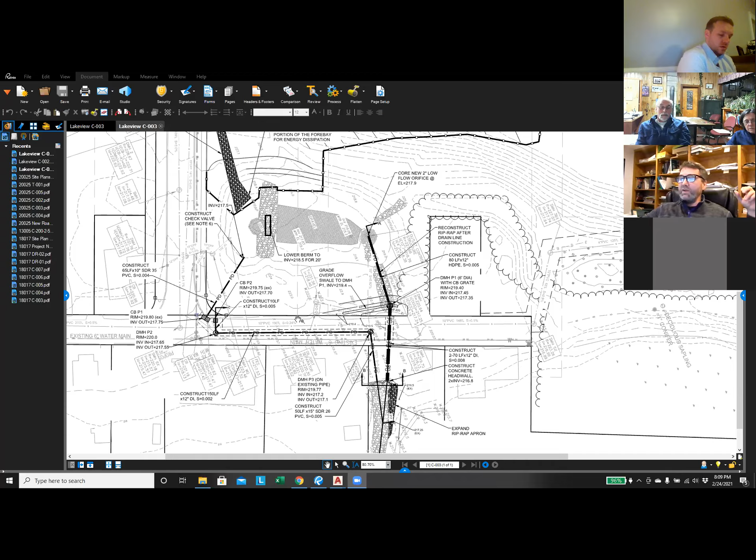In addition, we're removing the stone swales installed during construction on this slope and regrading it, adding a swale along the sidewalk to catch any runoff before it gets over into the sidewalk and runs down the street, essentially cutting off some potential bypass flow.

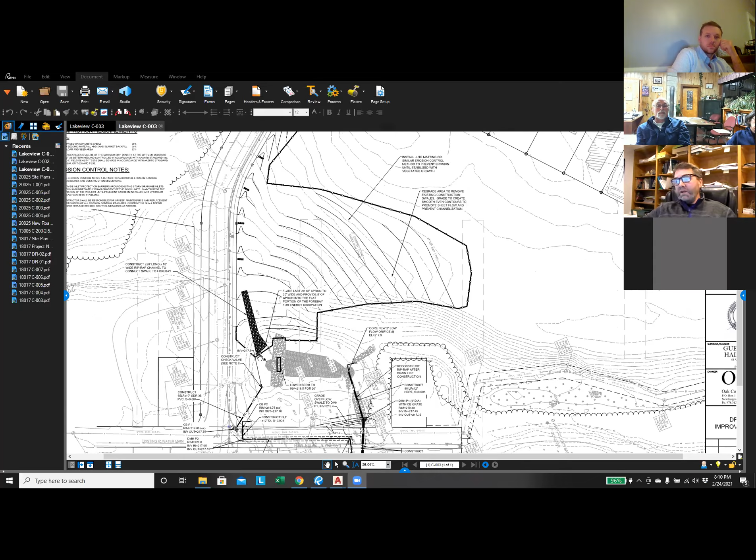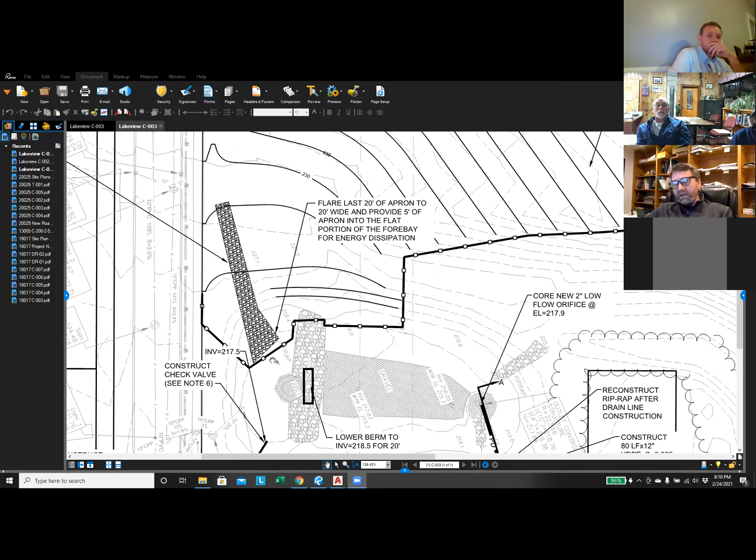One recommendation in Frank's most recent letter was to add some energy dissipation coming into this forebay. So what I've done is extended this riprap apron with a flare. It's a 10-foot wide apron, flared out to 20 feet, and it has to extend at least 5 feet into the flat portion of the forebay. That'll prevent any erosion once it comes down the hill and gets into the forebay. I think that pretty much sums up where we're at on this plan.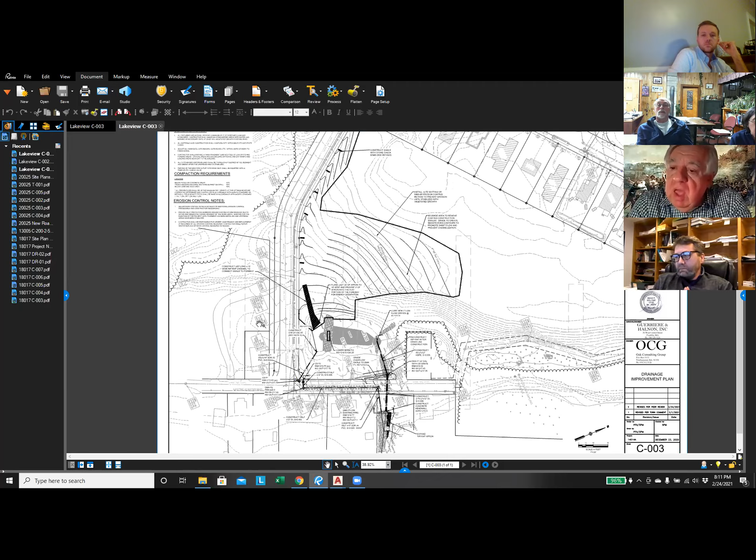I can make this short and then have a couple comments, but pretty much all the comments I've brought up in past reviews have been addressed by this latest set of plans, including the addition of the little energy dissipator into the forebay. I think that's a really good idea. I think that's fine.

There were two other items that were brought up to ask my opinion on. One was, is there some way on that nice slope that's there, it's about an 8 or 9 to 1 slope, 8 or 9% slope, could there be some kind of terrace type drainage system? Way back in the youth of my engineering career, we would use those on major highways like that.

So I went in and actually looked at the old design manuals, which I found out, at least the ones online, are now archived. Part of that is because better sedimentation and erosion control measures, the fabrics, the other materials you put there, have eliminated the need. The issue with the terraces was, one, they were hard to build and maintain, and two, you had to get rid of the water. So you typically had some kind of drain that connected down the slope, and if that got clogged up, it would go down the slope and cause a concentration.

So I would not recommend that terraces be put in this area here. Again, I think the whole key is to make sure it's put in correctly and the slope is stabilized very well before you remove any of the erosion controls. I think what I've seen here, subject to having oversight during construction and immediately after, I think that would be fine.

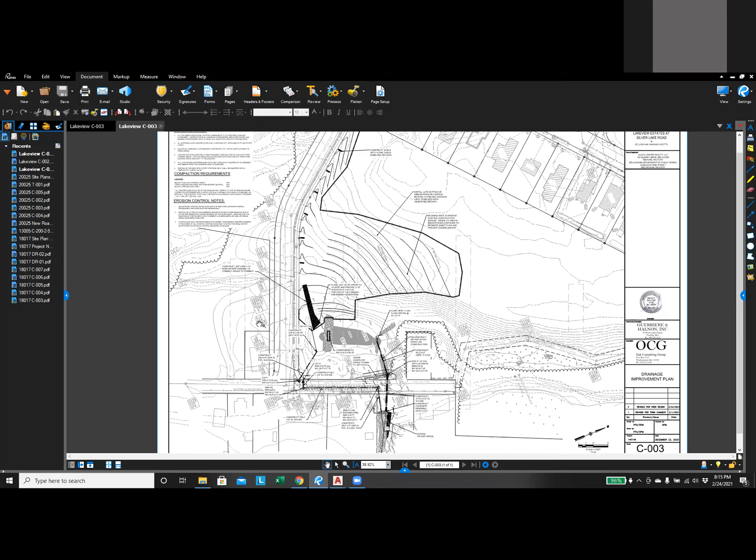Well, I want to thank our newest commissioners for taking this on and presenting their ideas, because I think the ideas had merit. I think we asked Frank on behalf of the commission to investigate it, and I know they brought it to their team, because I had conversations with some members of their team.

In fact, we discussed what our status was on organic chemistry, and I decided that's part of a life I'm glad I left behind. But it's really good to have commissioners involved with ideas, and the ideas were evaluated. I think in this particular instance, what Frank is saying makes a lot of sense.

I'm going to ask that commissioners, when they have thoughts and ideas like these, bring them up at the meeting so we can discuss and evaluate them. We don't want to be doing work behind the scenes, but in this case I think it was warranted. Again, I want to thank both members, Ariane and Noel, for undertaking this, because it just makes the commission better.

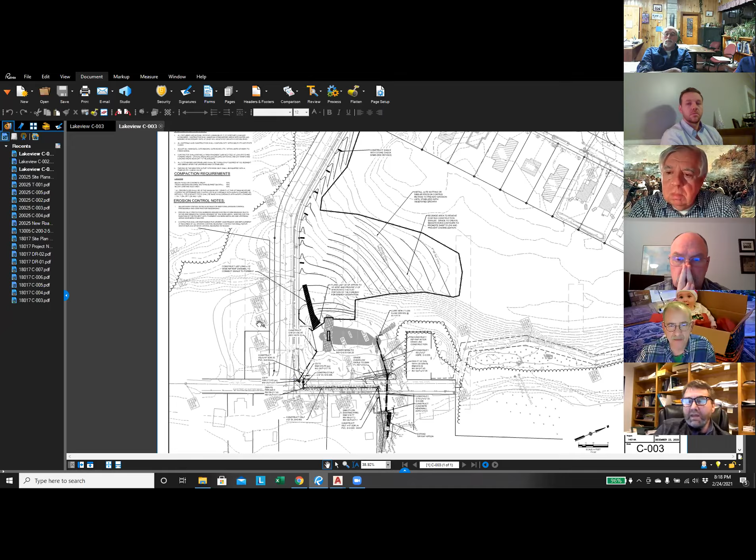I have one about the... we lost you. Oh, sorry. Yeah, I had one about the operating manual part. Are we going to get to that? Got it, the operation and maintenance plan. Yeah, I have a question about that, but I don't want to jump ahead if this is... No, okay, we're open for questions now.

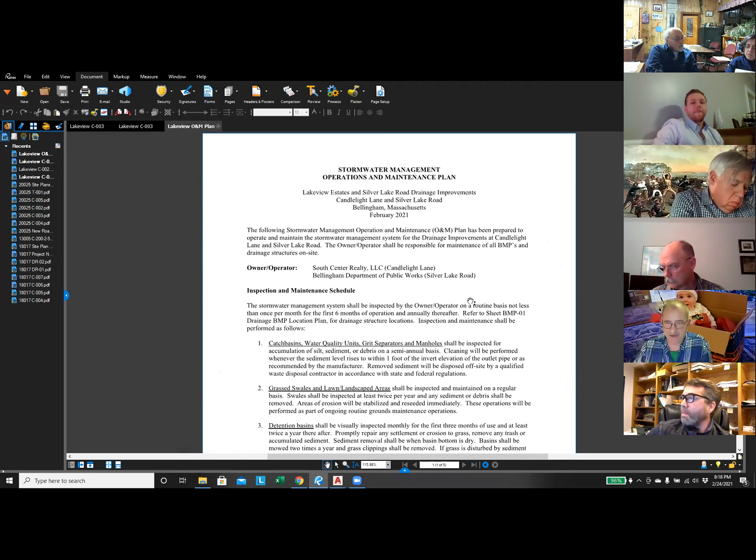Go ahead. All right, so on that plan, the cover page or first page, there seems to be, in my view, a little bit of conflict of timing. The inspection maintenance schedule says the stormwater management system shall be inspected by the owner operator on a routine basis, not less than once per month for the first 6 months of operation and annually thereafter. That's fine. Then I go down to section 5 and it says sediment forebays shall be inspected monthly, which is fine for the first 6 months. But then it says accumulated sediment and debris shall be removed at least 4 times per year, which implies a different maintenance plan than the overall, which would be annually. So after the first 6 months, is it just the sediment forebays being dealt with differently? I just wanted consistency there.

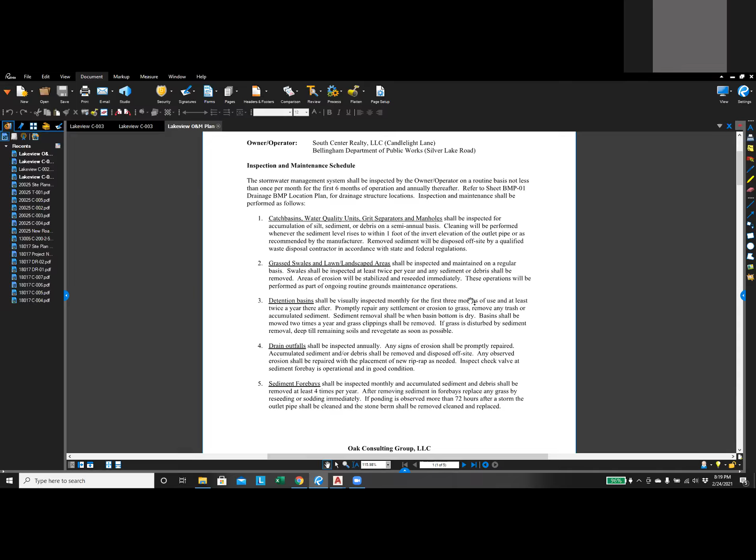I don't know if that's viewed as not a big deal, or if it's confusing to somebody else. Yeah, if I could, I think we kind of have the annually as a general blanket minimum, and each of these items that have a more specific time associated would supersede that. If that's the standard practice, that's fine. I just happened to catch it and say to myself, both for the DPW and for us, we're both on the hook with this in our own areas. I don't know if anybody else has questions about that.

Well, I guess that once the town accepts the roadways and the stormwater management system, it will be subject to a yearly inspection and review. That's normally the standard. I don't know if Don is still on, but... oh yeah, there it is. Is that satisfactory? Yeah, I mean, it's fine if it's not a...

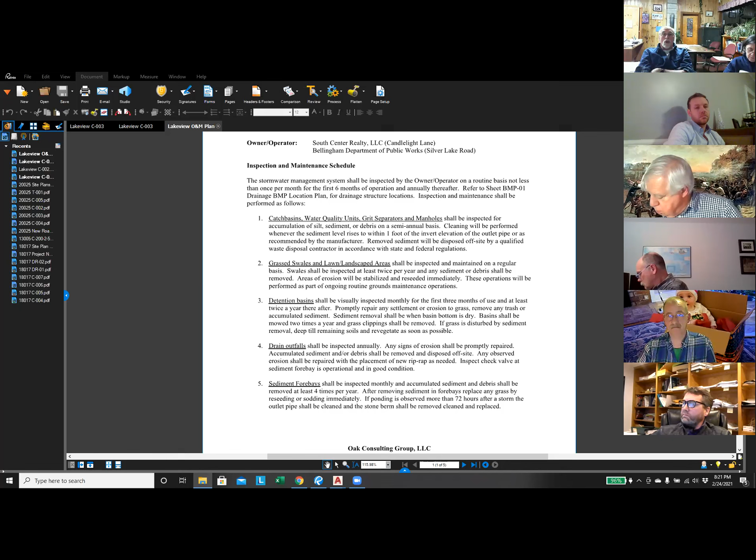Okay, well, that means our stormwater management upstream systems are working properly. You want it to never get to the forebay, and that's what catch basins are for and so forth. This is not during construction—during construction it was obviously a mess, but once it's constructed, the idea is that the water's treated before it gets to the forebay.

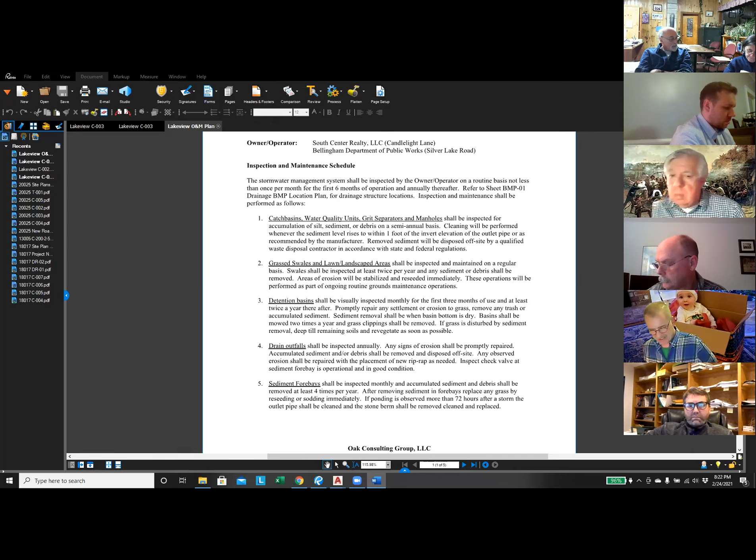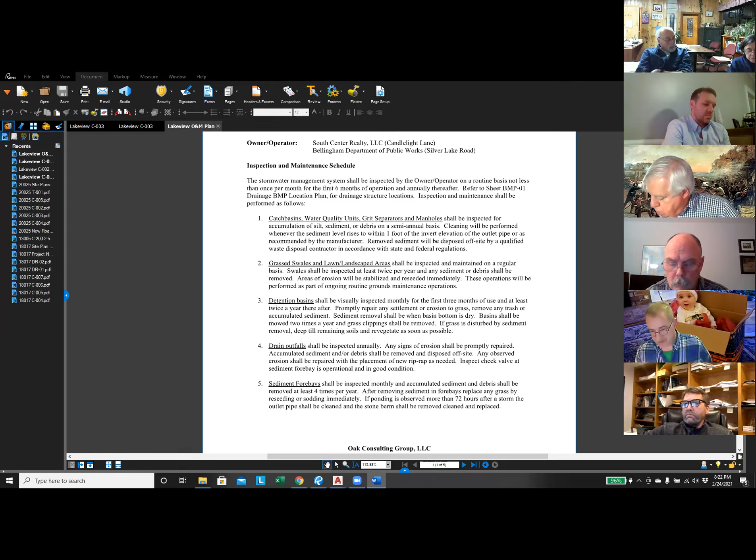In one of the documents provided by Amy and Ann in the Dropbox, I think under the peer review section with Frank and the comments back and forth, the area that caught my eye—and I know we spent time as commissioners walking this area—was the end of the discharge area, the riprap and swale area into Silver Lake, where it had not been dealt with properly and needed to be addressed. It looked like in one section it was talking about cleaning that out, but in another area it mentioned the riprap looked in good shape, like it didn't need any attention. So if it's going to be revegetated or re-cleaned out down at the end near the lake, that's fine, but I wanted to make sure that was explicitly going to happen.

I can address that—Frank, Sean and Jim were there as well, and we looked at that specifically. Technically it appeared there might be a little higher elevation there than existing conditions, but it was completely vegetated with wetland vegetation. So the consensus, Mike, was that rather than excavate and disturb the soils and wait for new plant growth, we'd be better served letting the existing vegetation remain as is. It's all wetland vegetation, and we didn't see any evidence of silt.

That seems a little different than when we were walking in as commissioners a couple of times, standing down there. It seemed like at least twice we stood near the end and said this has to be dealt with. So what changed your opinion—just a reevaluation of the elevation?

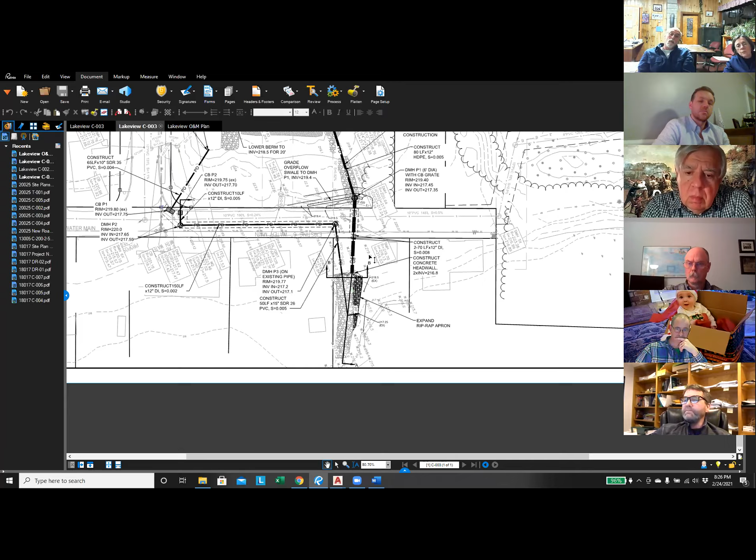Right, okay. And the riprap swale has been slightly widened right there to accommodate that. But the volume of water is going to be very similar to what it is.

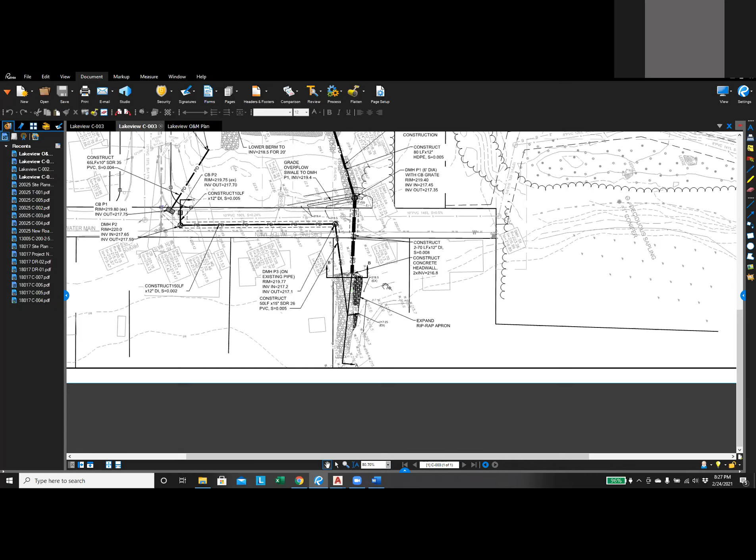There's not going to be an increase in the volume of water because we're catching it, and it's actually going into the basin. The only time there'll be an increase is at the 100-year storm event. Is that correct? Even then, I don't know that the volume is increasing, and what we have here is an actual reduction in the rate of flow going to the pond.

To expand a little bit on what we were just talking about, right now there's just one 10-inch pipe, so all the storm water is being forced through that one pipe, producing significant velocity coming out. By dispersing it between the 3 pipes, we're going to calm that down, so I think there should be an improvement to that effect.

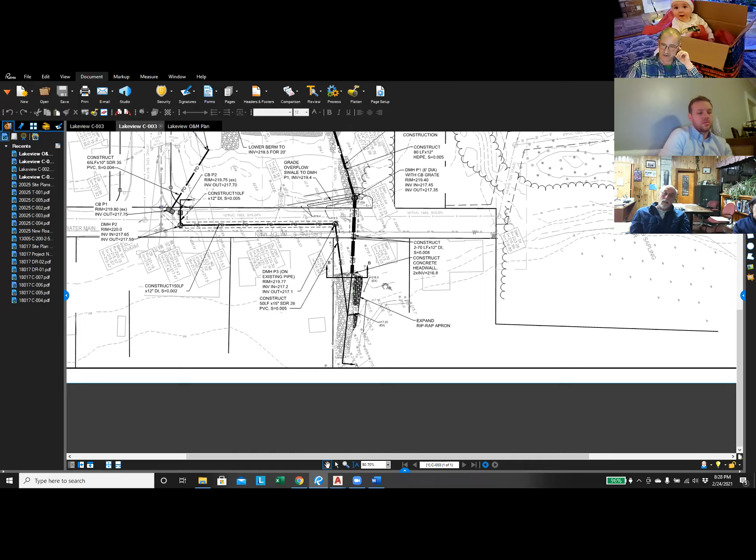Okay, and the last thing I was going to ask was in regards to what was brought up at the last meeting. I know this is kind of last minute in the planning of things, but what Noel and Ariane had brought up about the limestone and/or trees instead of just grass on the slopes, to deal with both phosphorus loading and perhaps erosion control a little bit better on the slopes than just grassing a fairly steep hillside. Any chance that can be reflected in the developer's willingness to help abate the impact on Silver Lake?

Well, we talked about this a little bit before too, and this is where it crosses over to the Bellingham Shores project, where the developer is donating, I think it was $120,000 for re-landscaping and making improvements to this area at the town's will. We provided a conceptual plan showing that's where that donation number came from. So right now that's kind of in the town's court as part of the Bellingham Shores project, once the money is donated.

So I guess maybe to further expand on Mike's comment, the riprap swale you're putting in to accept the flow coming in parallel to the sidewalk - now would there be any pollution attenuation if limestone was used in that area? Is that maybe what Mike was thinking? Would that help with phosphorus reduction, or would the velocity of the water as it traverses into the forebay make the effect minimal?

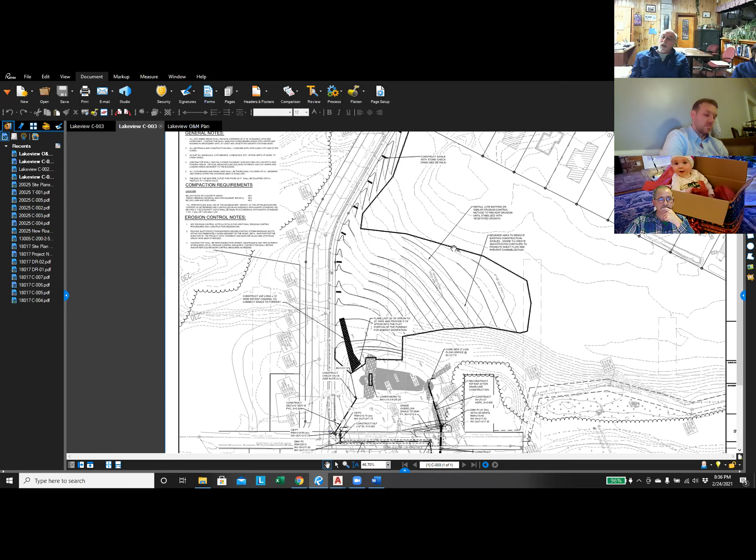Yeah, okay. But I'm still going to ask Sean if he would be so kind as to do some sort of investigation and maybe just get back to Ian on that. I will. And anything we can do, it's going to be an improvement.

Members of this commission were involved in the purchase of Silver Lake, and when we move on down the road, we don't want to leave a weedy mess for the residents. Yes, absolutely.

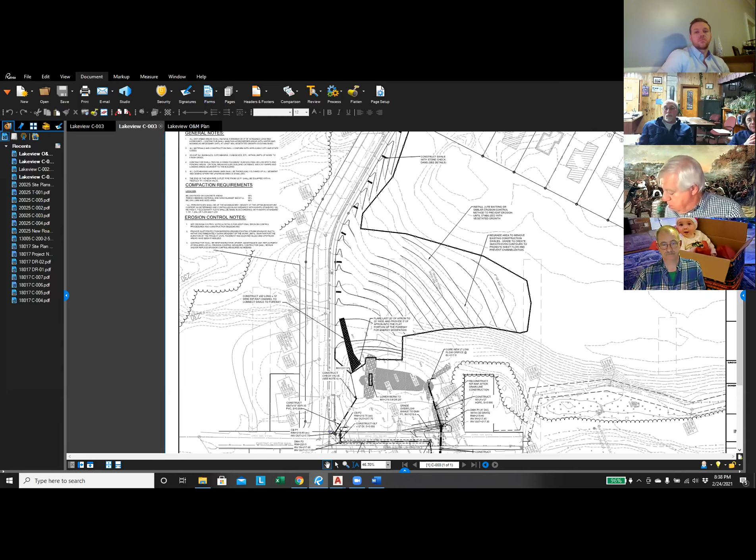Great, I appreciate it. We appreciate it. We're very pleased that this is going to be a long-term solution. I think so, I think so. All right, you all have a good night. Thank you. Thank you, Sean. Bye-bye. Thanks, Don. Thank you very much, Don.

And thank you, Frank. We're all set. Thank you, folks. Appreciate being here. Look forward to the next couple of weeks. Take care. Okay, thank you very much, Frank.

Just two quick things for the commission. We had the meeting minutes for February 10th, but I don't want to put them up for acceptance yet. I think they need a little further review. So has everyone had an opportunity to look at the minutes for January 13th and January 27th? Yes. Okay, are there any comments?

Amy, I have a question for you. Are you on, Amy? Yes, I am. Did you get the email I forwarded to you? Just now, while the meeting was going on. I was going to chat with you and ask you, but I could only get to James or Sean Malone, and I didn't want to chat with them. I highlighted some stuff. Some of it's just little typos, but I figured I'd send those to you and you could just correct them. But I can go through them here. Whatever works for you guys is fine with me.

Whatever the commissioner wants, whatever the chairman wants. How many little corrections do you have? One's a question about what we meant, and the first one has like 8 or 10, the one on the 13th. I could just stick with the questions and let her deal with just typos. Some are just obvious typos. Typos aren't a problem, but questions in terms of intent are important.